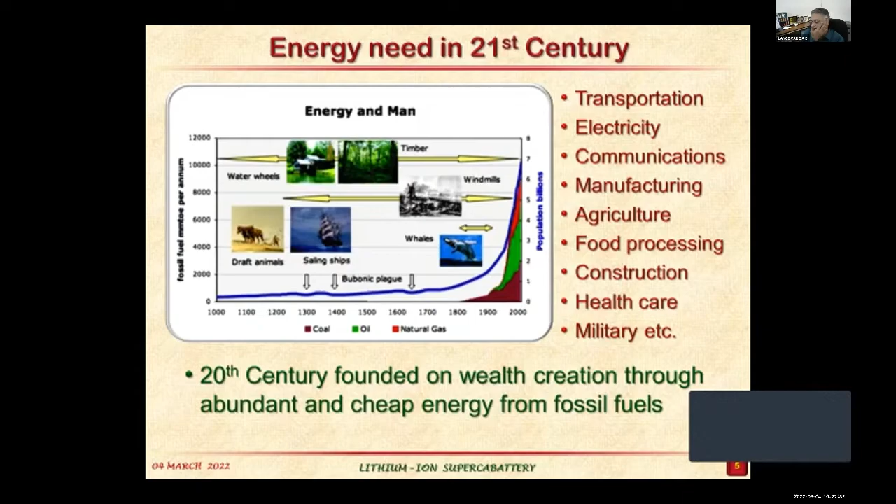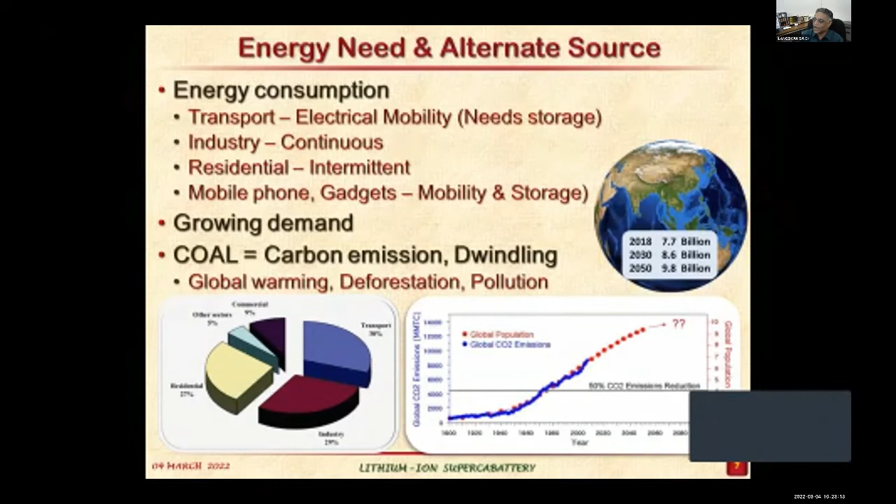So if that is the case, as it was pointed out by other speakers, it is the carbon dioxide, and the stakeholders for generating the carbon dioxide are all given here: agriculture, residential, industry, electricity, and transportation, plus each country has been given a quota of carbon dioxide, and carbon is the issue with respect to today's problems. And transport, all these aspects we will not be in a position to avoid, but we must find the solution.

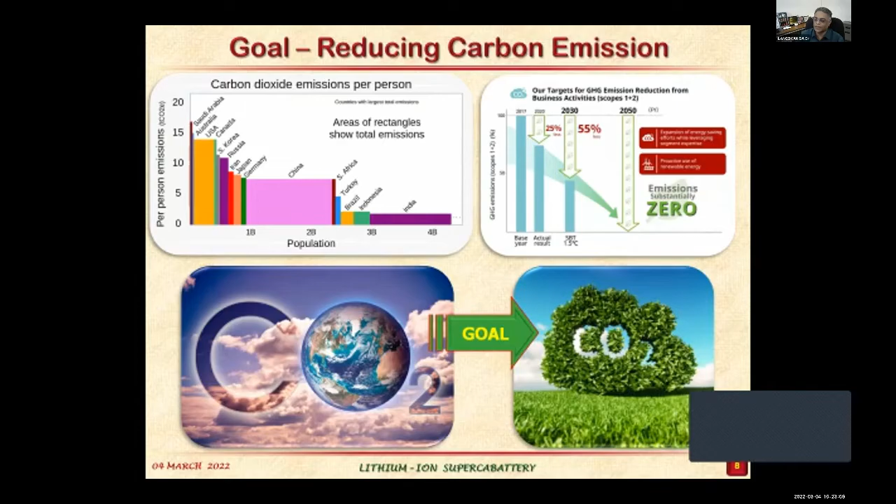The only alternative, as all of us pointed out, is the nature's creation of solar when compared to all other energy sources. The sustained energy coming from the sun is about 23,000 terawatt at an instant of time. So with any increase in the population and the increase in energy, if we make it completely dependent on renewables, definitely the carbon emission as well as the related effects can be overcome.

But the sun is not available all through the day, 24 hours. So we know it is intermittent. Whenever we are not using the power, much sunlight is available. Whenever we need it, sunlight is not available.

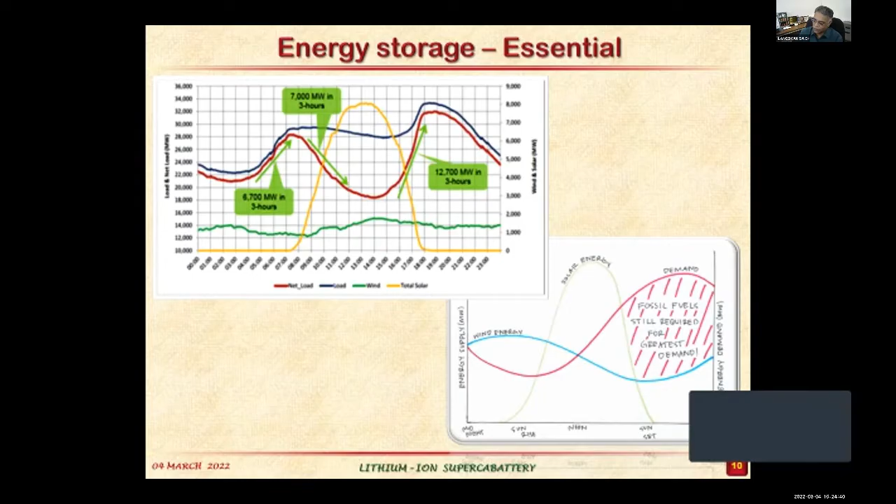So energy storage definitely becomes a relevant portion today. In that perspective, there are many types of energy storage technologies available. But is it possible for us to adopt all of them? When it comes to mobility especially, if you see the capacity for energy, the time duration it is available is very short. So when it comes to mobility, it is the electric based systems like battery

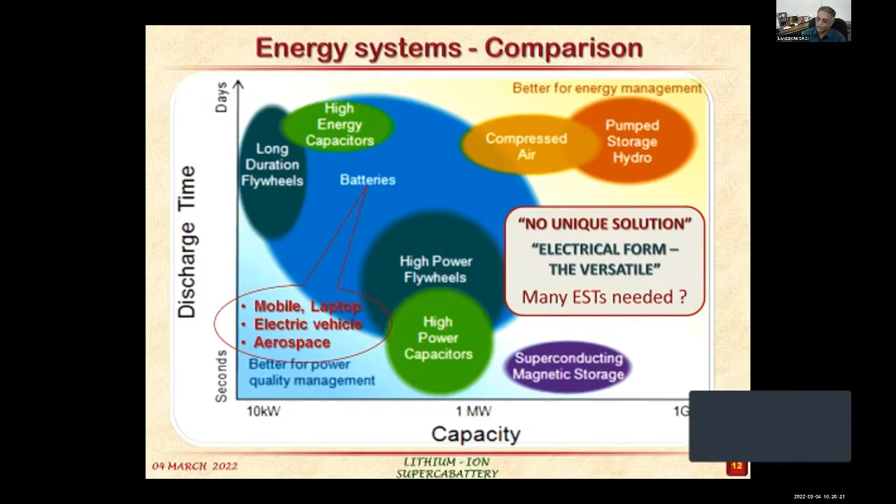which are very important, because for a mobile or a car, or even for our launch vehicles what we are working on, I cannot carry magnetic storage or flywheels, and long duration compressed air kind of things is not possible. So it becomes confined to: at the touch of a button, I am getting the electricity. Mechanical aspects will not sustain it, and if a rechargeable aspect has to sustain it, it becomes the battery, which is the versatile form of electricity.

We the space people, yes, our requirement is very less, but still there are launch vehicles, spacecraft, different types of functions which I don't want to elaborate here. But still, technology-wise, we have no other go but to develop electrical energy storage-based energy systems, where these parameters are very much relevant for our terrestrial applications also.

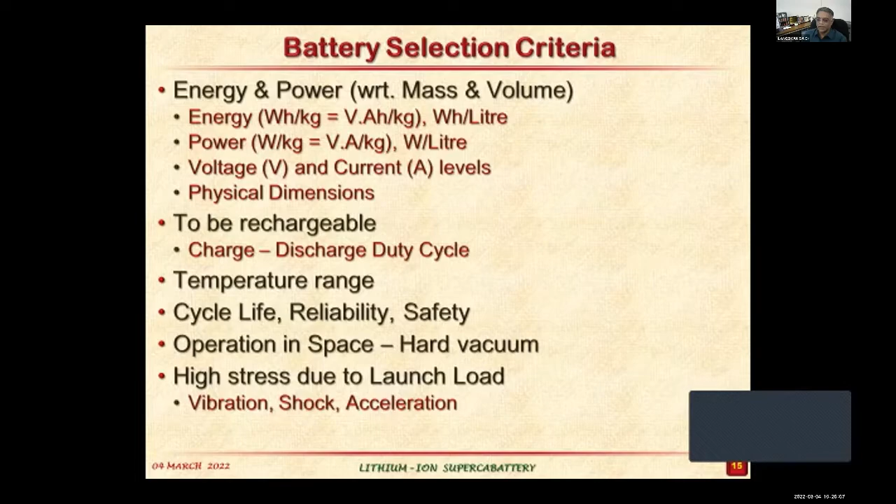Without talking about anode and cathode, it will not be complete. I will not be dwelling into it, because the colleagues or distinguished guests who are there may not understand the chemistry portion. Don't worry about it. There are two terminals in any battery. The electron is coming out from one area, and in another area it is getting consumed.

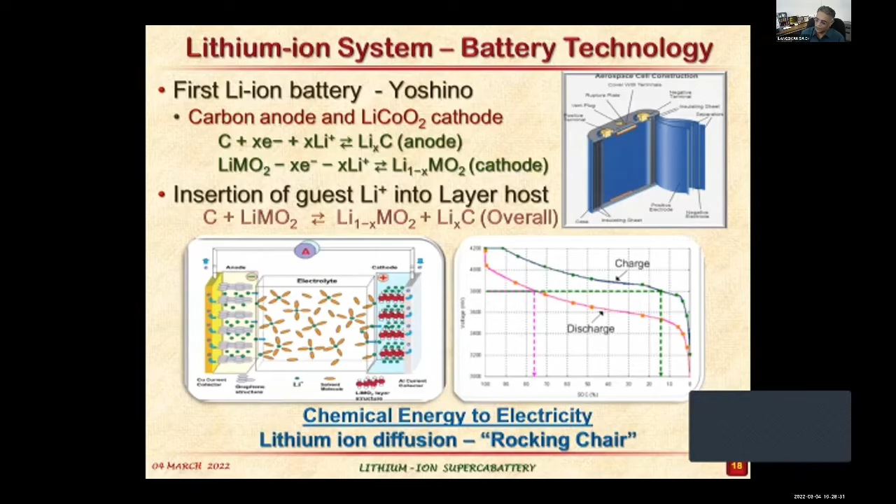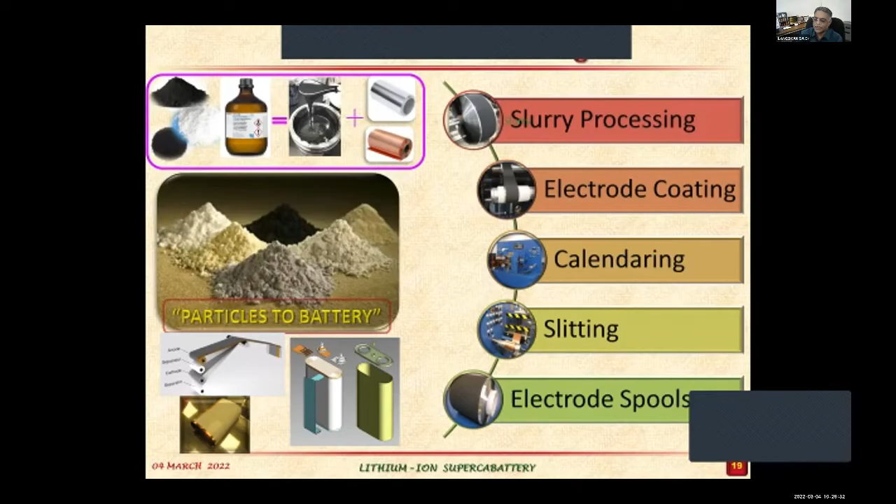So these powder particles are becoming kind of a roll, and the rolls are wound to give the stack, and this is the stack which is used. What I'm trying to say is that I'm giving a grip about the system, starting from particles. These are all the hardware elements - precision slurry coating materials, technology, infrastructure is required, and several types of industries are required to support the raw material supply chain.

All these aspects are important, which we have mastered. Yes, mastering - we are now getting the cell that is coming out of the technology and the lab, or from industry. But what is the problem? Infrastructure - yes, different types of infrastructure are also available. In summary, if I look at it, the baseline technology to produce lithium ion is available. Fine. Then why do we have this kind of hue and cry?

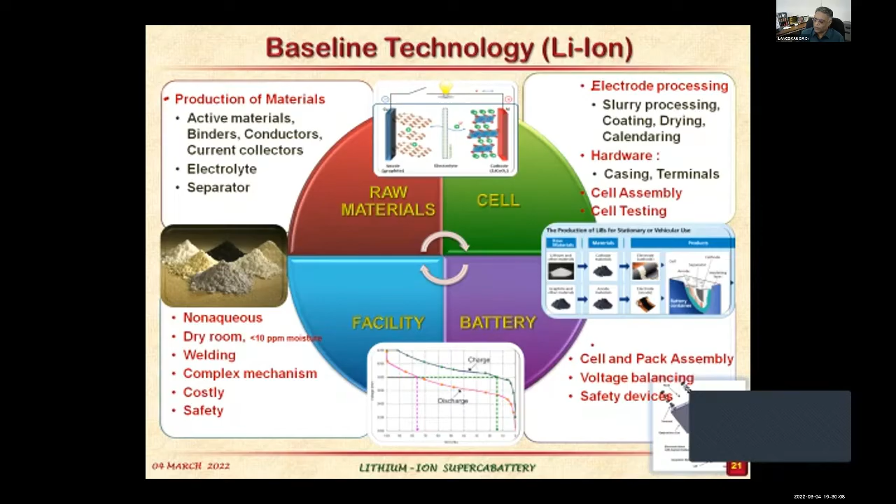But this baseline availability is also well demonstrated by the hard work of my colleagues. We have started from 4 ampere hour to 100 ampere hour for satellites. We have demonstrated - ISRO has demonstrated, VSSC colleagues have put in their life and efforts, a lot of effort has gone in. But still, there are some issues with respect to making it more and more efficient - automatically making it cost effective, making the technology affordable, reliable, safe, and eco-friendly. There are some more points which I'd like to cover.

Electrochemical systems are at the pinnacle - you see the fuel cell, the capacitor, or any other systems. If we have the energy, that means at a level it can supply for an hour or 2 hours, something like that. But when it comes to peak power - see, electric vehicles, always we have the requirement of gear change, I love to ramp up, I love to cruise. In that condition, I need a little more power also, like when an upslope is there, I need the power also.

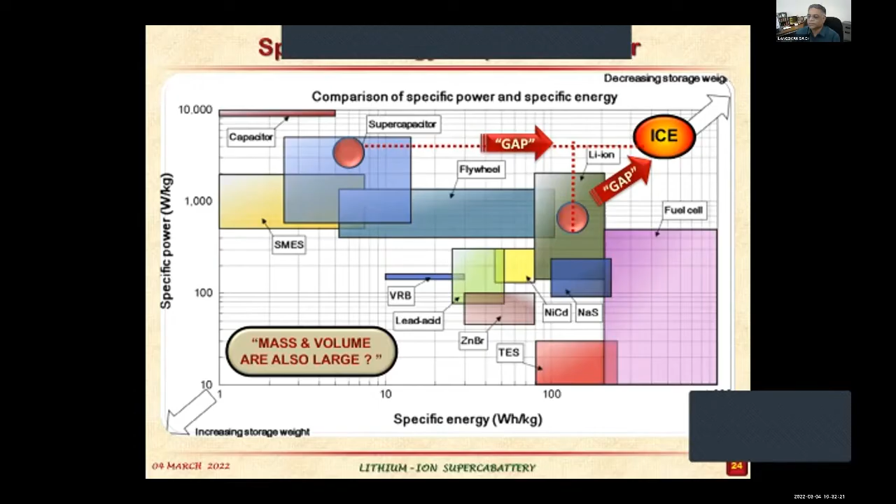And if I am doing so, in that process, if cycle life comes down, then cost goes up - the reliability aspect, then safety aspect. How I am going to overcome these to make the existing system more and more efficient, or in future, like aluminum ion or sodium ion - even if any new battery comes, the situation is more or less the same. The energy is available, but the power is not available. Supercapacitor is one system where power is available but energy is not available. So now, how to fill these two gaps?

I will be more concentrating on lithium ion only. For supercapacitor, I will just bring in the intricacies of making it - maybe our Dr. Narasimha Rao may be touching on that, because I don't want to get into that domain. So this gap, how are we going to fill it, how are we going to make it sustainable? Yes, first of all materials are available. Is it enough that we are able to improve the energy density? Like now we are starting with carbon, that is somewhere here - if I am going to silicon, definitely I will be able to increase the energy density. Is it sufficient if I am able to make a system? A host of materials are available - anode material, cathode material. But in spite of that, there are still some more limitations.

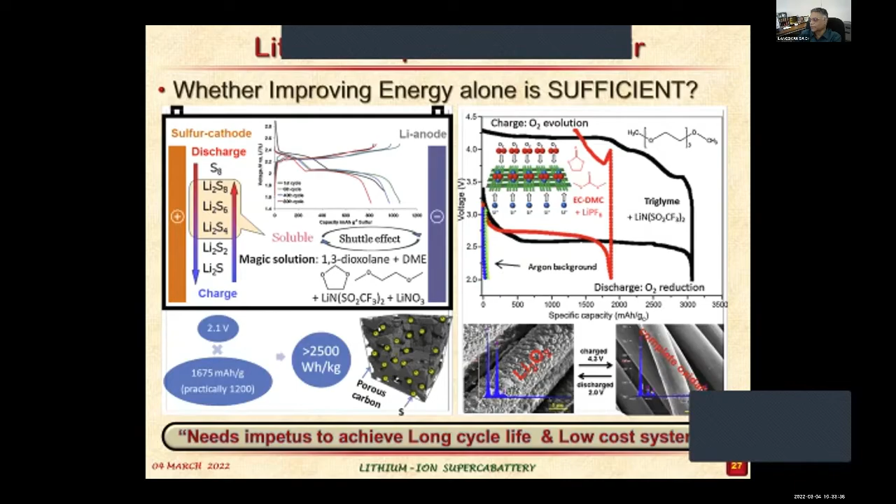Even if we go to lithium air or lithium sulfur, we are not in a position to harvest the full energy available from the battery for an adequate duration of maybe about 5 or 10 years, or about 5,000 cycles. If I get that, the cost will come down, as well as the charge and discharge aspects coming into picture. If that is the condition, I have to improve this aspect in spite of the system being available to us.

See, what do we mean by that? Energy density goes up. If you look at this barrel where lithium metal was there, I'm increasing or concentrating the energy within the system. Mass level comes down, but the power is not going up.

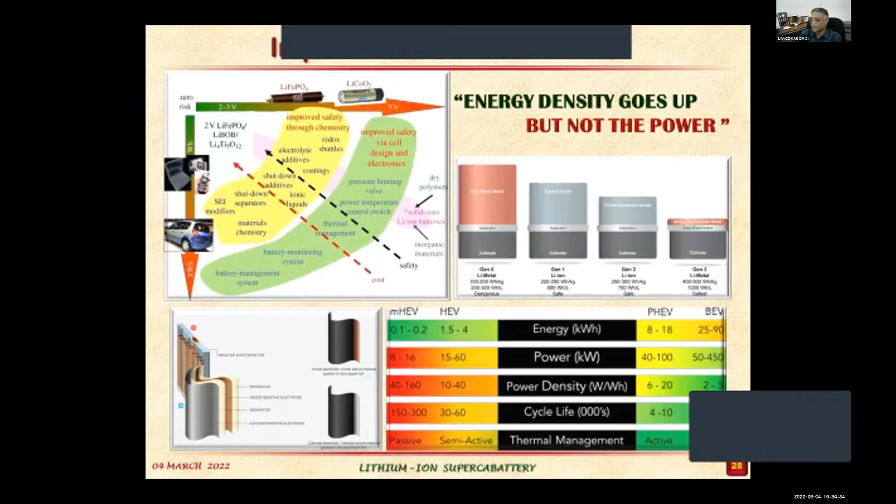So that is what it means: if I go from 100 watt-hour per kilogram to 500 watt-hour per kilogram on the right end, I am only reducing the mass and increasing the energy density, but the power portion is still not at rest, which is killing the life of the battery, increasing the cycle life and the cost portion of the battery. So increasing the energy density alone will not give us comfort. That's what now the red button has come to the right side, that I am able to touch the energy portion of the internal combustion engine.

At the same time, there is still a gap between the supercapacitor power level and what I have to meet in the internal combustion engine. So this is where, if the battery is able to meet the power, it is not in a position to meet it. Why?

Is there any issue? Any energy storage system may get charged over the daytime, but I need to get this power out during about 3 to 4 hours - over 12 hours, whatever energy is stored should come out in 3 to 4 hours. That means it will be storing the energy at a lower rate, but delivering the energy at a very high rate. So that's what is actually an efficient energy storage system.

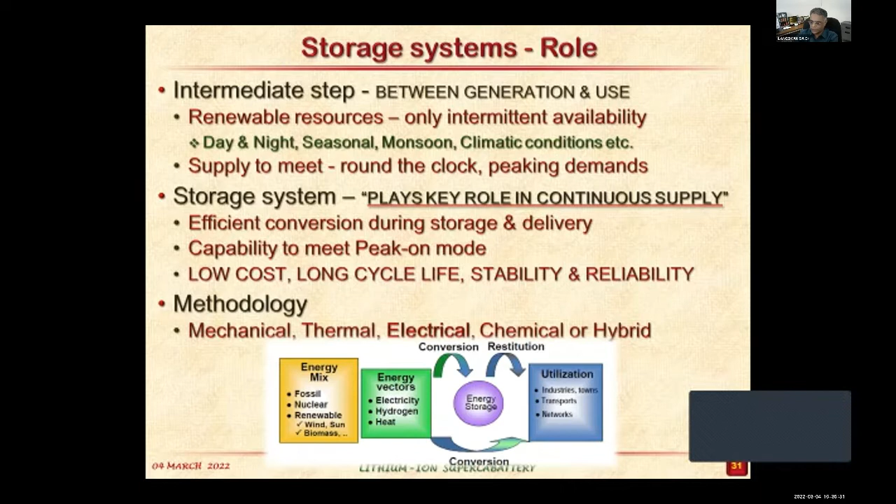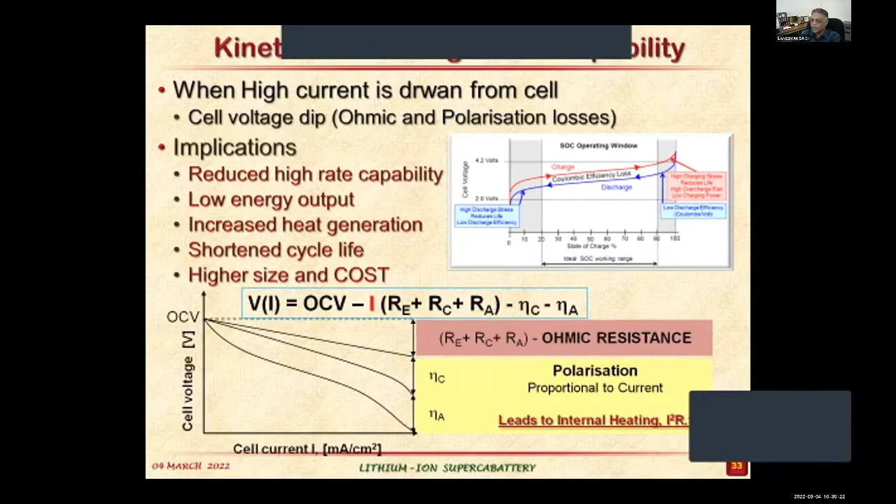So if you see all these conditions - the voltage level, charge rate, fast charge rate, fast discharge rate - all these things are eating away the energy which is not available from the battery. Is it technically or conceptually meeting? Yes, it does. That's why the available voltage is reduced by I times the resistance value, which is the negative form, and I is the one causing the heat to get generated. So if I force high power, automatically I will be losing energy. That is what it conclusively says.

Is it true? Yes. If I look at the kinetics, if I look at the electrode construction, if I look at how the electron is coming out, all these things are definitely in line with why it is having slow kinetics. Now, how am I going to come out of this?

Energy is available, but it will slowly only give it. Is it possible that I am going at about 30 km/h speed? Not possible. Supercapacitor - we know how this conventional capacitor and supercapacitor are differing, so I don't want to get into this one much.

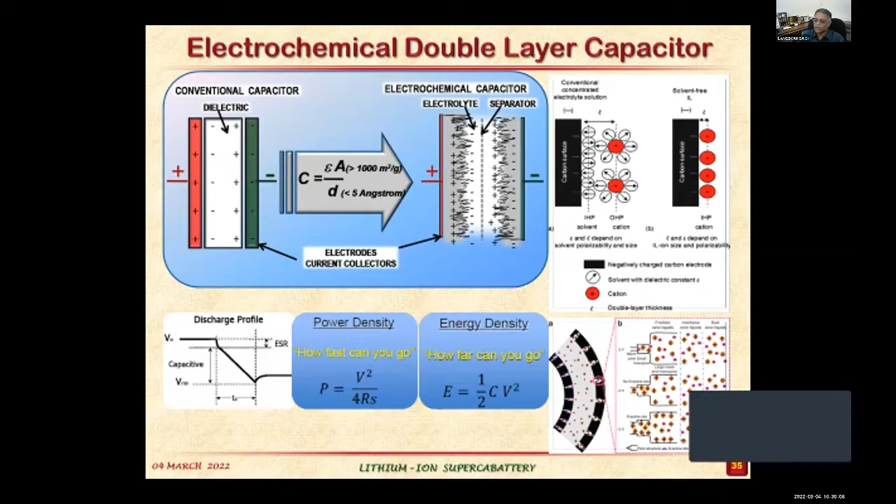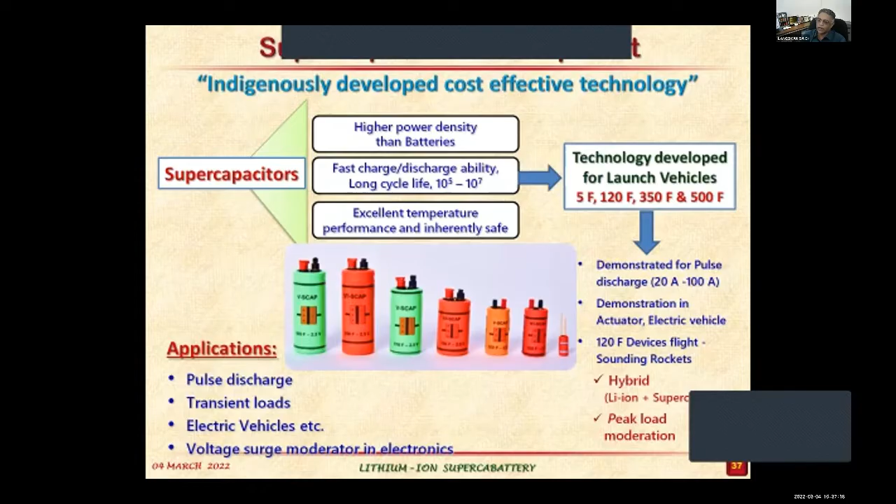But still, I will use the concept we have developed. So one is something like the rabbit, where the charge and discharge will be fast, it will come down quickly. But the other one, the battery, is something like a tortoise, where it will slowly go, but for a long time. If suppose I am able to mix these two, whether I will be able to get both is the point. So we have done the development here. The concepts are very much meeting, cycle life is there, and safety aspect also is there.

In our launch vehicle, we could also prove the technology of the supercapacitor. Everything fine, but the only thing is it will be able to give power only for about 1 or 2 minutes. Where trams are all using the supercapacitor, but every minute they have to charge it.

But this is the time at which we were able to concentrate on battery and supercapacitor. Suppose the one which is having lower energy - the battery has higher energy, lower power. But the electrochemical capacitor has higher power, lower energy. Suppose if I combine these two as a hybrid, I will be able to touch both the power aspect as well as the energy aspect.

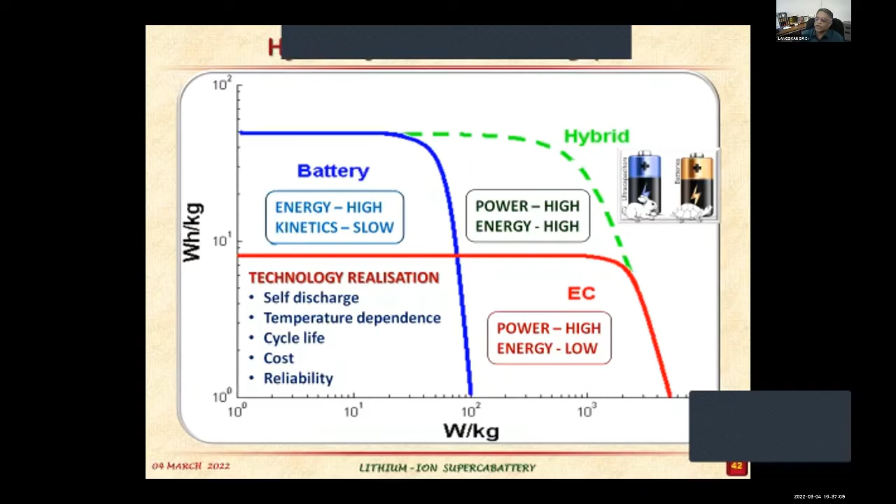So that was the one which gives the confidence. If you see the blue curve, at a slow rate we will be getting the power. The red curve is the one which, if I increase it by 10 times, I will not be able to get anything. If I combine the supercapacitor, two supercapacitors across one battery, I am able to get the 7.5 peak as well as 0.7 continuously, which is the ideal condition required for any electric vehicle.

So now this was the confidence. We tried, we combined the concept of two concepts into a single hybrid system. We could see the red line where we are able to get a very low drop. So the energy is fully available, power it is able to meet.

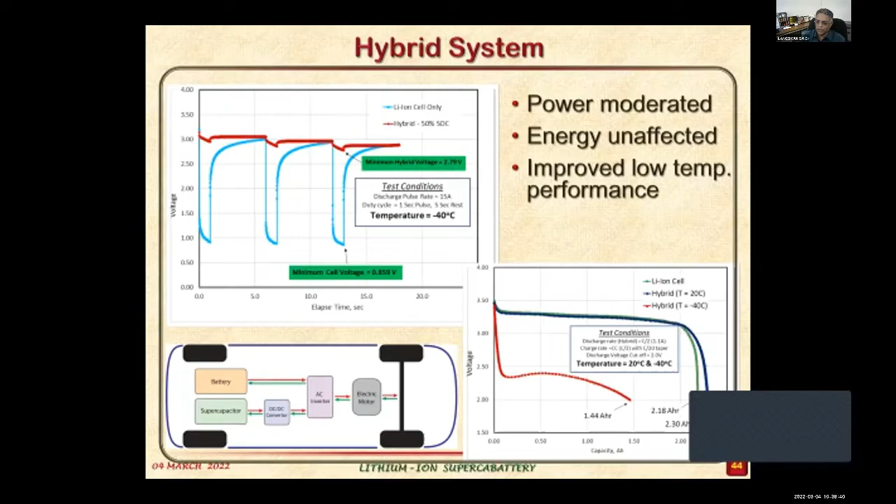Otherwise, the blue one will be drawing so much. So any electric vehicle, in line with battery, if I am having the supercapacitor also, definitely I will be able to meet it. But the problem is that I have to carry two devices, and if I am carrying two devices, then the efficiency comes down.

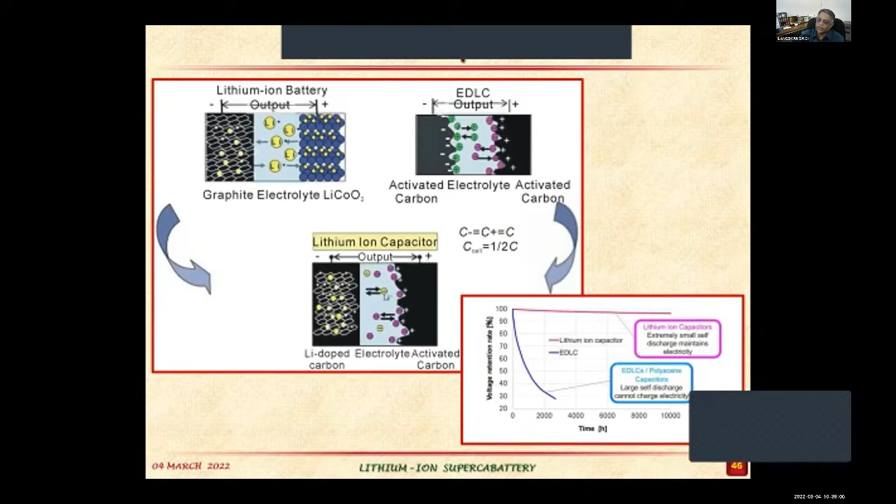Can I combine these two? That means if I take the battery electrodes, anode and cathode are there, and the capacitor, anode and cathode are there. If I combine the anode with the cathode of the EDLC, I am again limited by the capacity of the supercapacitor on the right side - the cathode is limiting it. What is to be done?

That is what was our complete problem. So the peak should be handled by the supercapacitor, and the continuous sustained current should be handled by the battery. That's how we were planning.

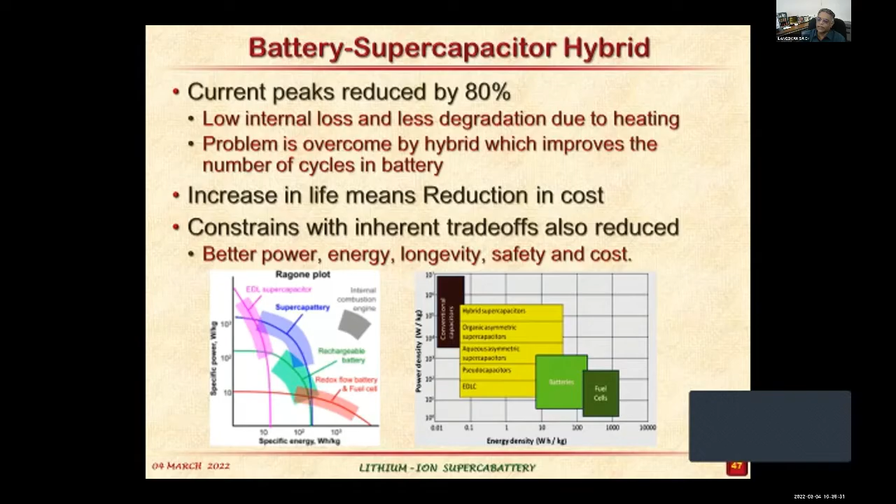So when we planned like that, with one small car, we could demonstrate if both I am having, but mass-wise we are not able to. There is a lot of electronics that comes into picture, taking care of the voltage of the supercapacitor and the voltage of the battery. So this was making us a little more uncomfortable.

So what we did, we combined both the electrodes inside itself in a novel way, which I will tell you now. That is what we are calling it as a supercabattery. So each one becomes complementary to the other - that way we were able to combine the concepts of both electrodes.

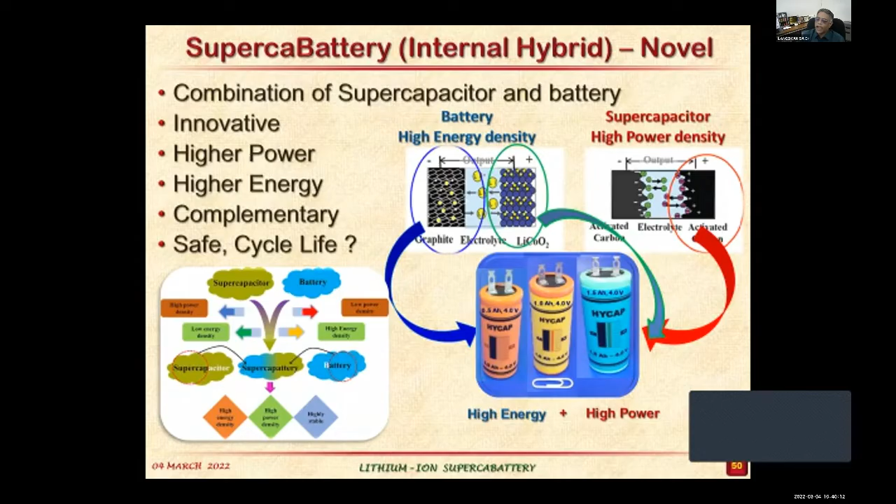So that was acting as a very good power delivery, as well as the power delivery of the supercapacitor, and energy delivery of the battery. So that's how we were able to do it, and we could get the battery performance. Peak performance is coming, overcharge it is able to meet, safety conditions it is meeting, and short circuit it is able to give even about 380 ampere. These are all tested values which we could deliver.

So with that, we got full confidence with respect to combining these two concepts of materials - supercapacitor as well as battery. That is what is the title: battery is complemented for power by the supercapacitor, and supercapacitor is complemented for energy by the battery. So this was the concept which we had in mind.

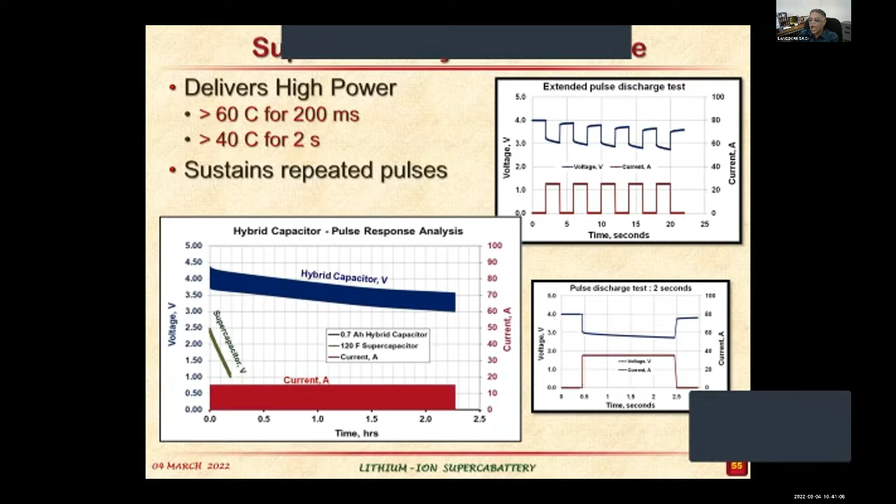And we could also see, in a nutshell, why supercapacitor. So like if I am going down a downslope, there will be power, back EMF will be coming up. That back EMF we will be in a position to use for the recuperation of the battery charge itself. That way, peak power is handled with the supercapacitor, and peak backup also is saved with the supercapacitor.

But at the same time, the battery is not allowed to see the peak current, so life is improved. So the safety aspects are also better, and the short circuit aspects are postponed. Thus the cost aspect comes down. So these are all the points which we were looking at.

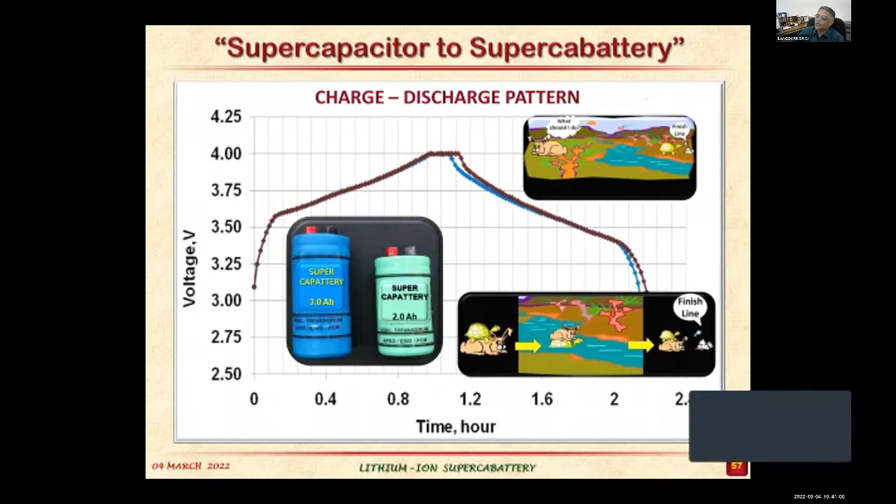So now, in our management parlance - earlier, the tortoise and the rabbit were alone, meaning they were having difficulty, so both of them were in a lose-lose situation. The rabbit and the tortoise were apart. But nowadays, what we do is combine both of them. On land, the tortoise goes on the rabbit, and when it is water, the rabbit goes on the tortoise. So at the finish line, both of them are reaching. By combining these two concepts, we could get a situation wherein power as well as energy are both delivered.

Now that I am able to confidently say that supercapacitor and lithium ion, if we are able to combine, we will definitely be meeting the internal combustion engine. The supercapacitor is able to thrive the battery. So battery concept alone may not be sufficient. Even if I increase the energy density, there should be a capacitor in parallel. That way we will be able to make them together a complementary system, so that we meet the requirements in a much better way. That is my point.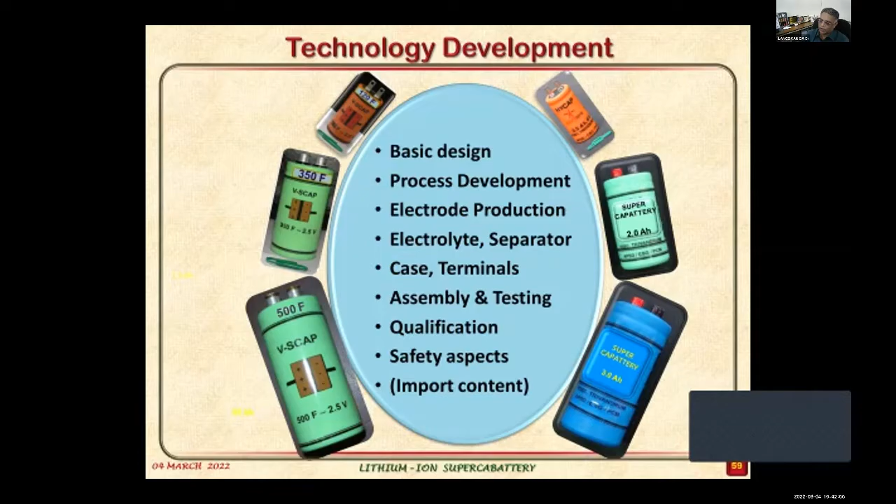On technology development, all our colleagues here have gone up to 500 farad supercapacitors. For our requirement, supercapacitor wise, up to 3, it can be easily scaled up. This is yet another situation where we demonstrated to the Honorable Minister in 2009 in Pune, for a big car, supercapacitor plus battery we could demonstrate.

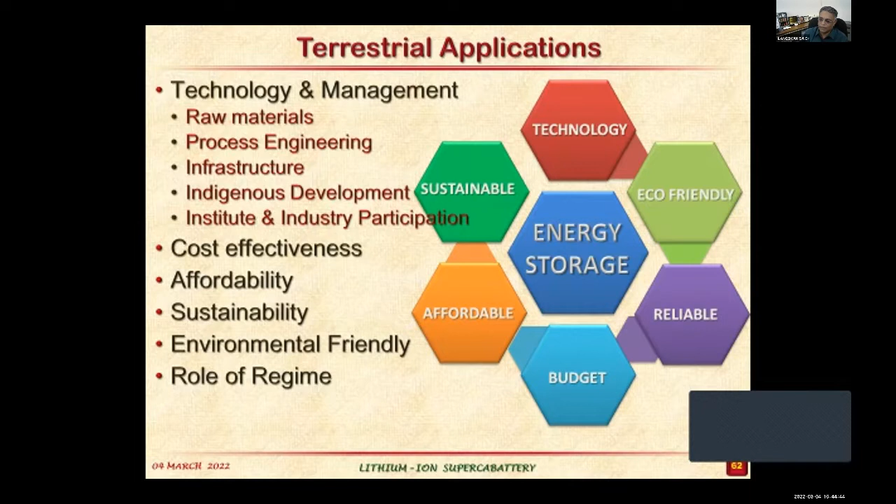Institute can come out with materials and process engineering. Industry shall be in a position to completely adopt from that, and definitely it is easy for us to prosper.

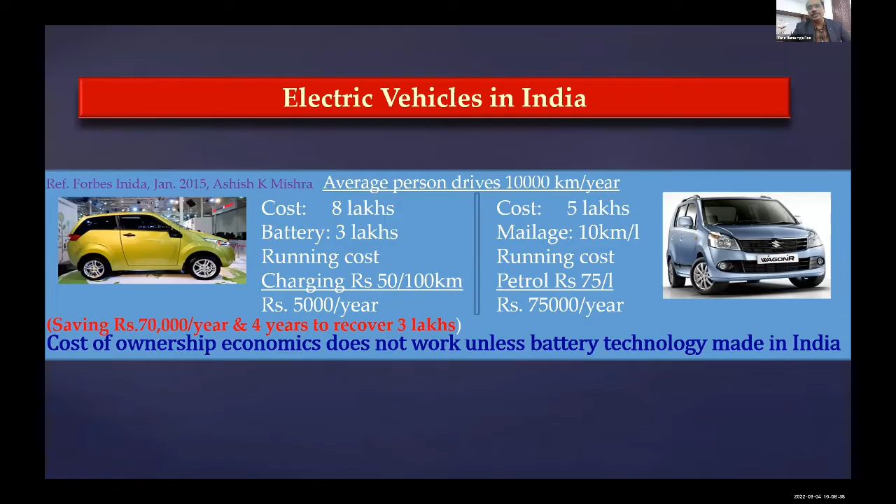Imagine if you can make your vehicles within the country, make your battery packs within the country, which is what's happening now, and if you can make the cells and materials within the country, you scale down the cost drastically, which makes the technology more competent and more adaptable. One more key point I want to make is about the firing of these vehicles.

Just a week back, there was an Indian company, Olectra, whose buses use imported battery packs, and one bus got burnt at Mahatma Gandhi bus stop.

Earlier we had scooters and cars catching fire, and on October 12th there was a fire accident that became very popular in the media. We then had a panel discussion about how to avoid these battery fires. I'll explain why battery fires happen when I get to the next slide.

If you look at cell manufacturing, 60% of the cost of the cell is materials. The remaining goes into the machines used for making the battery cells, but I think it will take more time to make those machines within the country.

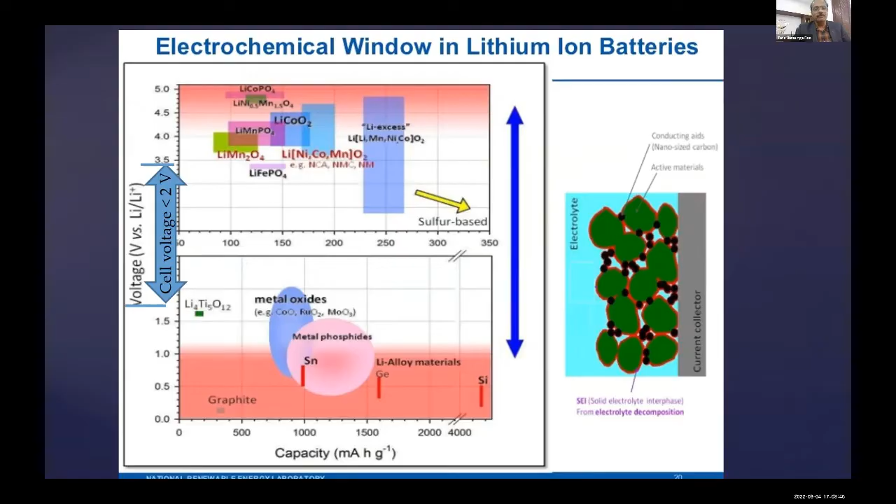So indigenizing the LFP material for the supply chain in the next 2 to 5 years, when all these battery plants come, they need the material, LFP. And if you depend on imports, the demand is growing very high all over the world. So even if you don't get cost effectiveness for LFP, you need to have LFP supply within the country for the sake of production and meeting the demands of our own car companies. So how to do that?

It is very easy to make lithium iron phosphate. Even a high school kid who knows a little chemistry can take the raw materials, mix them and do the solid state synthesis. But LFP is an insulator by itself, so it cannot draw the current. So LFP has to be coated with carbon, and that's the first thing. Each particle of LFP is coated with carbon to draw the current from the electrons generated by lithium intercalation and deintercalation to the current collector, the aluminum or copper foil.

And second, you have to make the lithium iron phosphate nano size because, as an insulator, the electron cannot diffuse a long distance. So the diffusion length comes down with smaller particle size. This is one key challenge for making this material. So we have established the method by solid state synthesis and shown that we are on par with any imported material. We compared with Clariant and Japanese companies like Toda, and we established that.

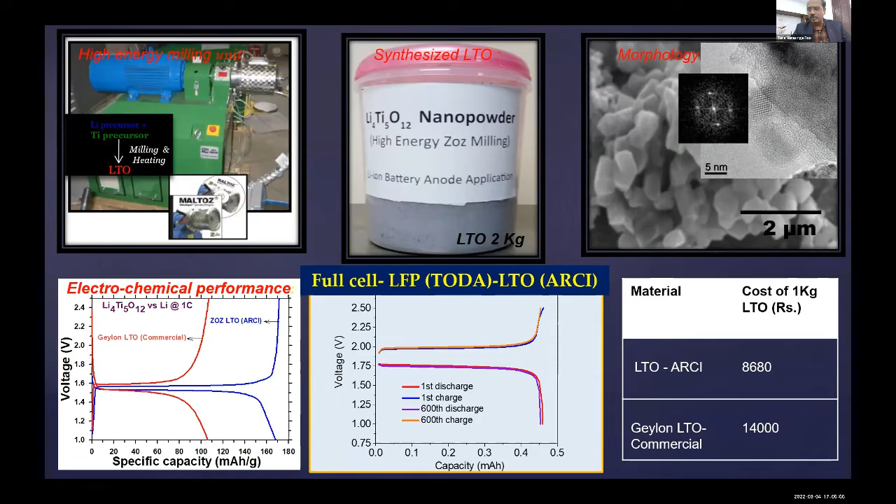So this is the battery materials. We also have similar technology with lithium titanate, fully developed and much cheaper than lithium iron phosphate, and we are waiting for a technology receiver; we have some contacts. We demonstrate at different levels, in the form of a fan or lighting, and some small electric bikes too. So now coming to supercaps, same thing. Supercaps are very well known, and Dr.

Ilangavan nicely explained the difference between the supercap and battery. And he also said that the material for the supercap is also key. And it's not so difficult to make a material. Maxwell is one well-known company, an American company, which Tesla bought now.

And they import the raw material, it is YP50, an activated carbon from Kuraray, Japan. And Kuraray makes this YP50 from coconut shells. They don't have enough coconut trees, so they get coconut shells from Sri Lanka, India and other countries, and then they convert it into the carbon.

And their technology is how to make it nanoporous, designing the nanopores suitable for storing this energy. That is the key technology. It is not converting coconut shell to carbon. And that is protected with a portfolio of patents.

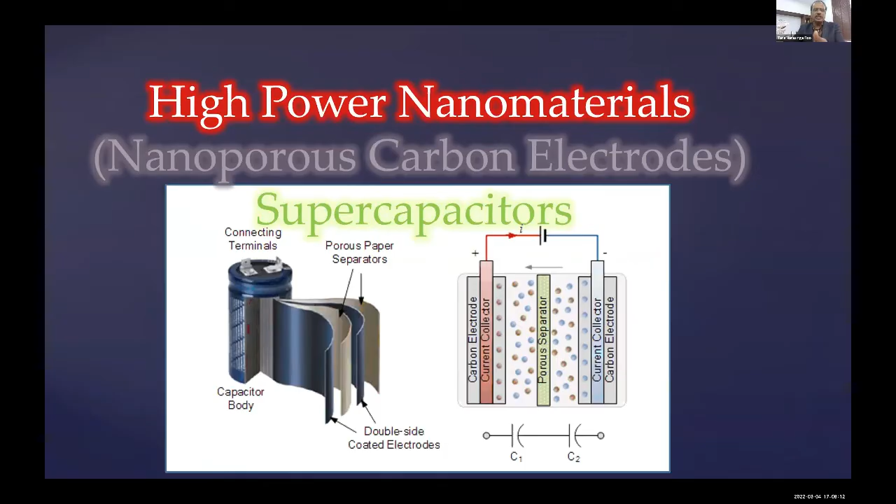So now what we did is, can we do something different? Because my problem is, can I make a material totally indigenized and intellectually protected? He already mentioned battery versus supercap. I don't want to talk about that.

Supercaps have high power density. They can be charged in seconds or minutes, unlike batteries, which take a long time, but batteries have high energy density. In China itself, they have plenty of lithium, but still they use this technology for their public transport buses because they get charged very fast.

You cannot use a car with a supercap because you cannot travel long distances. But a bus would travel for 5 kilometers, 10 kilometers. They can use a supercap, and whenever the bus comes to the bus station, the connectors touch the cables, and it gets charged in minutes by the time passengers get in and get out. This is already happening, and several countries are using this for public transport.

And what we did is, can we do this within the country? Initially we started with jute sticks, and jute sticks are useless material because once you take the jute skin for the jute bags, the sticks are only firewood, but they're very lightweight with a cellular structure. We converted them under nitrogen atmosphere to carbon with a proper KOH activation process.

We get graphene-like carbon with a very high surface area, above 1500 square meters per gram. We demonstrated that its performance, you can see here in the cyclic voltammetry, is on par with YP50, and the cost is pretty low. So we demonstrated a supercap of 20 farads. But that's not enough. If you want an electric vehicle to use a supercap, it should be more than 1000 farads.

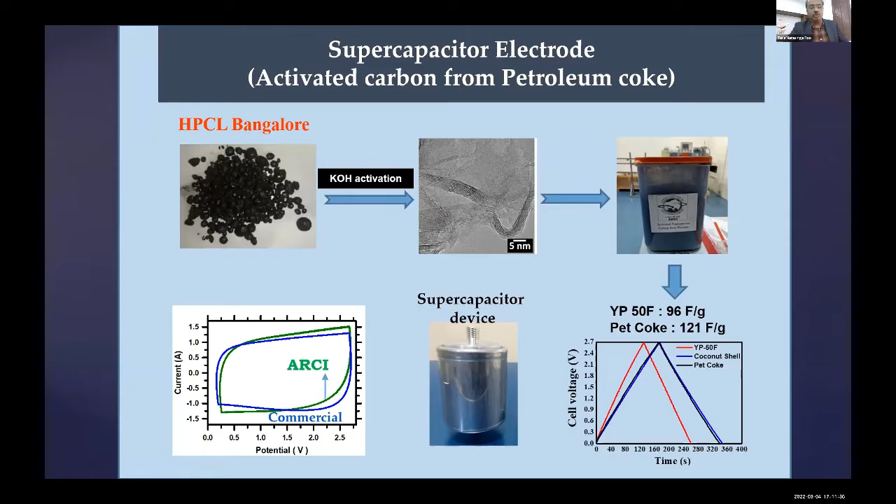And again we made a device with this. Electric vehicles need at least 1,000 farads to support any EV. So we made a 1,200 farad supercapacitor on par with Maxwell, with the help of HPCL, their significant financial contribution, the material sourcing and their expertise.

So we made the pilot facility, and some of the equipment we made indigenously, because for supercaps, some equipment we forgot to buy, since we bought the battery equipment, and some we made indigenously. We understood that equipment can also be made in India, because people think that we cannot make it.

Now we proposed a 50 crore project to DST to make a total battery line within the country at ARCI, with 10 crore support from the company, because unless you indigenize equipment manufacturing in the country, you can never compete with imported batteries from China. That is one thing all the industry should do, and we are doing that for the first time, because our initial success tells us that we can.

And now with partially indigenized equipment, like this in-house designed flattening machine, you can see that the green one is the ARCI supercap and the blue one is Maxwell. We're on par in the properties, we are in the media, and some companies are starting to come up. So this is what my colleagues and I work on.

And HPCL said that you have to demonstrate a bicycle with these supercaps. So a 48 volt motor has to be run with supercaps. That's not so easy. That's why I said you need at least a 1,000 farad supercap. A single supercap cannot have more than 2.5 or 2.7 volts, so you need at least 20 supercaps to get enough energy, even to run 2.5 kilometers.

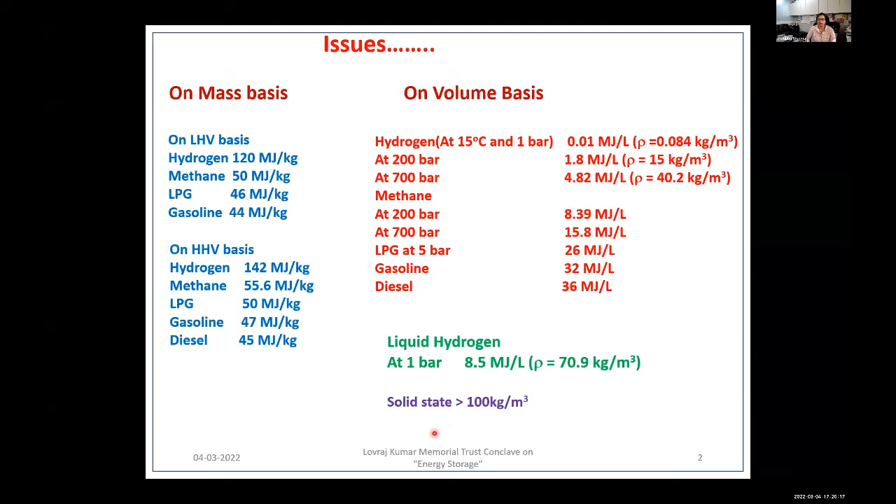So my focus of today's talk will be going straight onto the solid-state storage of hydrogen. As compared to other methods, solid-state has an advantage. In gaseous state storage, since the density is low, you require very high pressure tanks - the commercially available type 3, type 4 tanks are 350 bar or 700 bar pressure tanks, and they use special composite fiber materials, so the cost is higher.

At the same time, when it is such a high pressure, safety remains a concern. The other option could be to cool it down to 20K and make it into liquid. So the density improves considerably, and we can see that in these numbers.

But the process of cooling it down or making it liquid hydrogen is highly energy intensive. It takes up about 30 to 40% of the energy content of hydrogen. At the same time, these require super-insulated vessels, and whatever good insulation we may use, there will be losses involved. So there are boil-off losses. At times, even if you have a full tank and you leave it for a few days, you will find it vacant because of these boil-off losses.

So this can be particularly useful when you want to use it for a short duration, use it after refilling.

However, another option I'm going to discuss is solid state storage. This method has a higher volumetric energy density, and it is the safest method because you are not dealing with such high pressures or liquid, such low temperatures. At the same time, there are challenges too, which we will see. So you do not require either a high pressure or a low temperature for solid state storage.

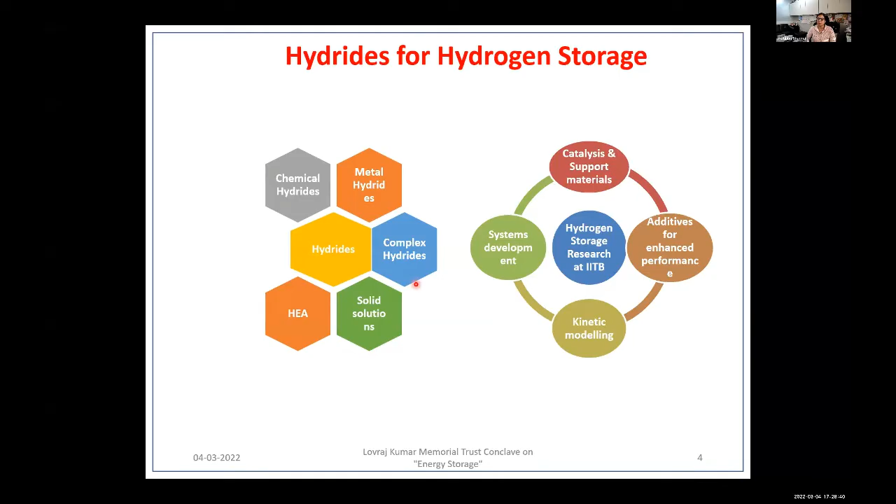So if we start with the metal hydrides, there are different classes. These are either intermetallics, where you have a combination of a metal element A and another B, which can be alloyed together to form AB, AB2, A2B, AB5, or A2B7, and several other alloys. Each of these has a separate characteristic.

Just to give a few examples, the AB5 type, the well-known example is lanthanum nickel 5. It has the advantage of low hysteresis—whatever the charging or discharging, it is complete without any memory, so no losses. It is easier to activate, and it is tolerant to impurities, if any, in the material as well as in the hydrogen gas stream. But the problem is the capacity is lower, and the cost of the raw material is higher.

Then there are materials like AB2 type hydrides, such as zirconium chromium 2, which have the advantage of higher capacity compared to AB5. But the problem is they are difficult to activate—meaning the first time you put in hydrogen, there is a lot of resistance. There is an activation barrier you have to cross through, which can be done by subjecting it to high temperatures or pressures.

Another class is AB, where the cost is comparatively lower and they can work close to room temperature, but the problem remains the difficulty in activation.

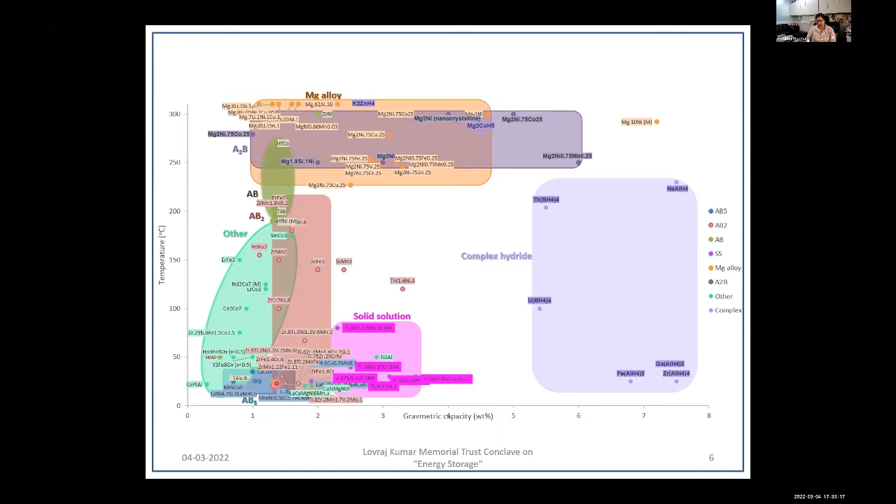Now, the major challenges if we look at these materials is—although they have large advantages—because these materials, when used, have a long cycle life. You can even charge and discharge with hydrogen these materials for thousands of cycles. So they have better safety, because if there is a leak in such a tank storing metal hydride...

In that case, the reaction of hydrogen leakage—hydrogen coming out of these materials—is an endothermic reaction. And in that case, the reaction will itself stall, and as such there won't be a threat of any explosion or catastrophic event. So these are safe to operate.

They operate at conditions close to room temperature and pressure. They have higher volumetric density, and there are materials which can be completely discharged. So whatever you have put in, that amount of hydrogen you can take back.

Now, it's also the case that a typical material when it comes to metal hydrides—we say the maximum that traditional materials store is 2 weight percent. So we can do the calculation that metal hydrides operating at room temperature and ambient pressure conditions can be cost competitive to a 700 bar pressure tank.

Now, due to the lower operation, we can say we can still get a higher volumetric density, because the volumetric density of metal hydrides is far ahead of that of compressed hydrogen tanks. At the same time, we are operating at a lower pressure.

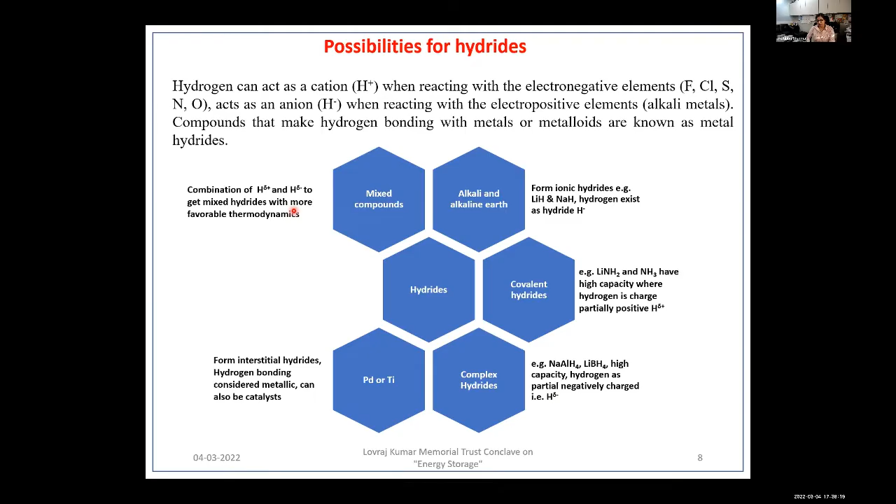So what can be done is we can have a combination wherein both these components are put together, so that we have a mixed hydride, and that could favor a better thermodynamics using that class of materials. Now, what exactly we look at when we talk about metal hydrides is...

These metal hydrides should be easier towards activation of the material, meaning the uptake of hydrogen as well as release of hydrogen, also known as the first hydrogenation-dehydrogenation cycle, should be easier. It should not require very high temperatures and pressure. At the same time, the uptake and release should be faster, so the rate should be higher, and they should have a reasonable heat of formation of hydrides.

This becomes very important when we talk about large-scale solid-state hydrogen storage systems, because one process is exothermic, the other is endothermic. A lot of heat needs to be supplied and taken out, so thermal management becomes important. In that case, metal hydrides with an optimum heat of formation, somewhere around 30 kilojoule per mole, would be very good to operate with.

These materials should be stable under repeated cycling, so cyclability is important. They should not get poisoned by impurities, and the safety associated with the use of metal hydrides when operating with such tanks is also important. At the same time, cost matters.

To give you an example, BCC alloy like titanium-vanadium-chromium alloy has the advantage that absorption takes place at lower pressure, 20 bar, and at room temperature. It has faster kinetics, and theoretical capacity is 4 weight percent. You can have a wide range of alloys by changing the composition of these materials. The problem remains that they have a sloping plateau and an incubation period.

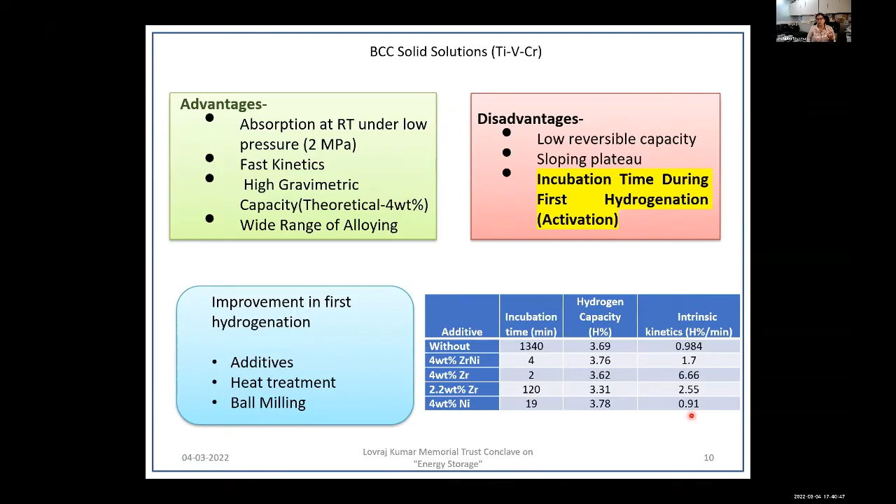Now another class of material is the well-known example of iron titanium. Although this has been studied, there are still several problems associated with that. It is a good alloy in the sense that it is cost effective. It can be operable under temperature and pressure conditions which can be easily coupled with a PEM fuel cell.

But the problem remains that it has plateau instabilities. It requires an activation step which needs high temperature and pressure. What can be done is we can dope it with various other dopants in small quantities such that it can be made easy to activate, while still getting many practical applications using this alloy, and we can even use industrial grade materials.

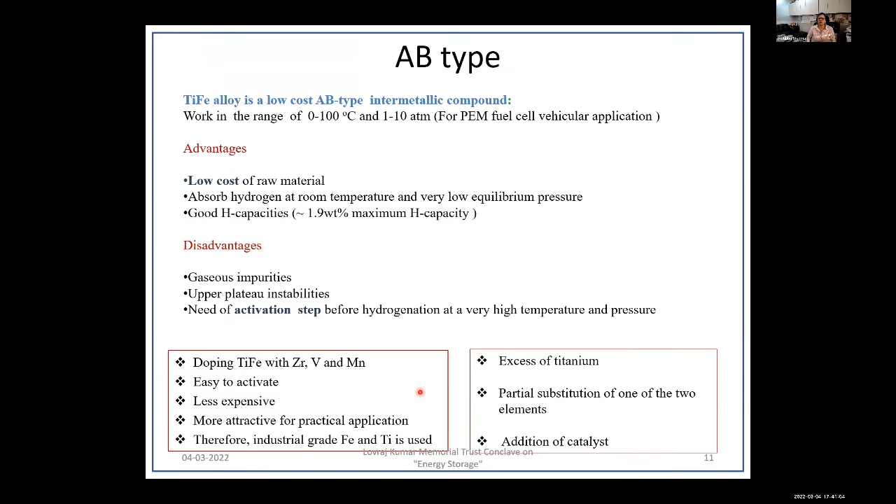We have extensively studied this alloy. We have seen the effect of going for non-stoichiometric composition instead of equimolecular, what happens if we substitute one of those elements, and what if we add a catalyst. If it is pristine, there is no activation taking place for hours. But as we dope it with different elements, the activation gets much faster. Earlier it required heating at 400 or 600 degrees for 12 hours; now we can do it at room temperature and 20 bar.

There is an industrial partner and UQTR, a Canadian university, involved in this work. So this was some examples of one class of hydrides, the metal hydrides.

The other class is like chemical hydrides, wherein they store hydrogen in much larger quantities than conventional materials, whether it is a physical form of hydrogen like liquid hydrogen or the adsorption way of storing hydrogen like carbon nanotubes. These materials can store very high quantities of hydrogen. We talk about 19.6 weight percent as against 2 weight percent in case of metal hydrides.

But if it were so straightforward, we could have found the solution already. There are disadvantages still: the hydrogen we get is not pure, and the problem lies with regeneration of these materials. These materials give hydrogen in steps. In the first step, 1 mole equivalent of hydrogen is released; in the second step, 2 moles; and in the last step, 3 moles, which takes place at a higher temperature.

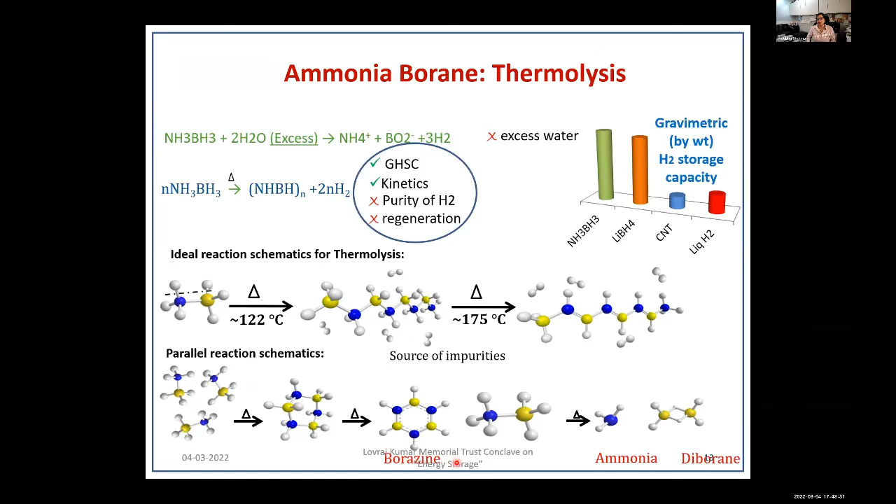So why not take advantage of only using the second step and get 13 weight percent hydrogen from this? We can also suppress the undesired products we get, like borazine, ammonia, and diborane, which could be poisonous for various other applications.

We have been trying to do that in our lab. We have seen that with different dopants, we were able to suppress the unwanted products to zero. Although the release of hydrogen decreased, with different additives we were able to retain it back. Now what we are doing is working on the regeneration.

Finally, with regeneration, these materials regenerate again in different steps, so you cannot do that on-board. It has to be a 2 or 3 step regeneration. Now we are able to make it a single step regeneration, and the yield we could get is 85% in the regeneration step, in a single step, one-pot synthesis and dehydrogenation.

So this is what we were able to do: instead of having multiple steps, we just dehydrogenate it and put the hydrogen back, so that this could be suitable for on-board application, and we can still get about 13 weight percent capacity with such materials.

Another class of materials known for their higher storage capacity is the various borohydrides. We can get hydrogen from these either by thermolysis, heating them, or by putting them in water. When you use thermolysis, the temperatures are higher, so sometimes hydrolysis favors the reaction, and you can do that at room temperature.

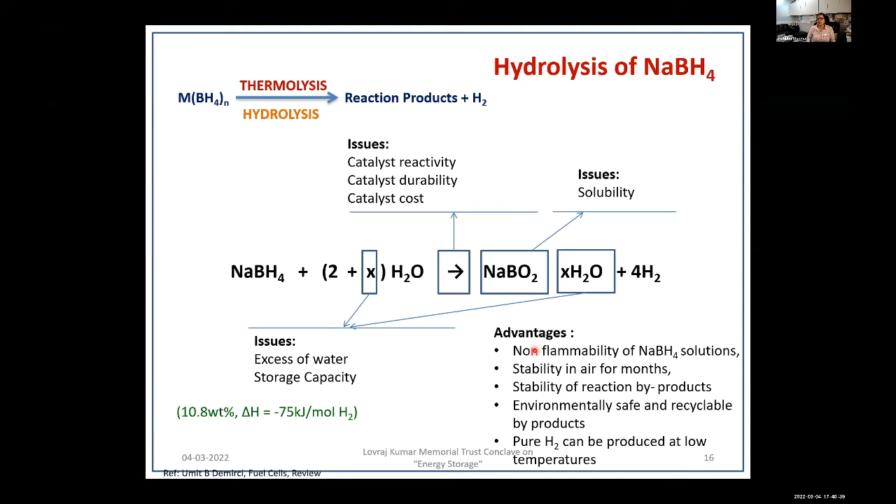But the advantages with this system is that it is a non-flammable, stable system which has a stable byproduct, and this is an environmentally safe method of hydrogen storage.

Now, what we do at our place is we start from scratch, from the atomistic modeling, from the DFT, from atoms level. We take the material to preparing hundreds of kgs of material. From a system design at a computational level, we fabricate such systems to large scale, and then we do performance analysis. So in our lab, we are doing materials as well as systems development right from scratch, taking to large scale. So we start with the parent alloy, whatever alloy we have decided for working on.

We do a lot of DFT to look at what are the structures, adsorption energy, charge transfer processes, and the stability of that alloy. We put in hydrogen in such systems, and then we study which are the favorable places where hydrogen can substitute, how much amount of hydrogen we can get, what is the storage capacity, and then we modify such systems by substituting with different metals, different elements.

Again, we do all these calculations. What is the binding energies of these systems? What are the charge transfer that is taking place? Density of states? And what if we substitute by more than one element? And what is the capacity which we are going to get? Once we have optimized a particular material, then we go for a large scale synthesis. First, we synthesize on 5 to 10 gram scale, and then we go for 10 kgs of alloy synthesis.

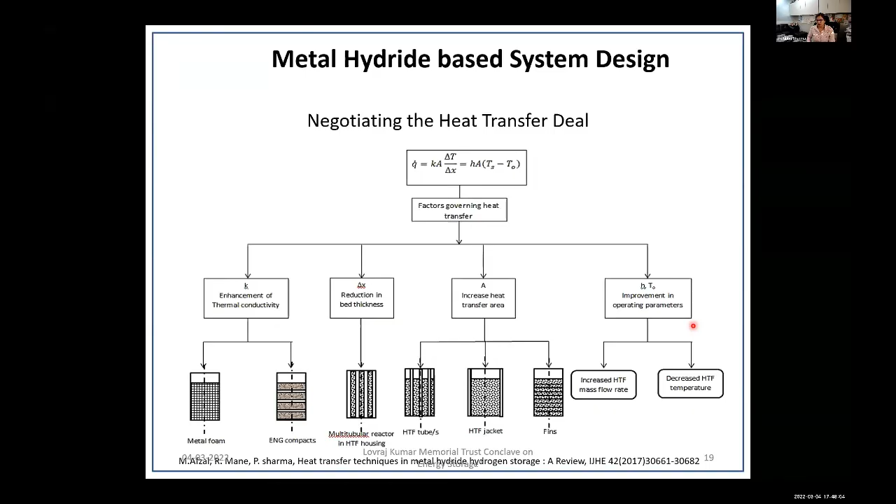Just to give a quick glimpse of the work we are doing, we start from the DFT analysis, designing the material, making it on small scale, then making it on large scale, taking from the computer to the lab scale to an industrial scale system. So this is how we go from material, then we go on to the systems design. We do a lot of simulation modeling and optimization to come up with a heat transfer arrangement with heat exchange area with different types of arrangements, so that the system performs well when integrated with such materials. And finally, we go for fabrication.

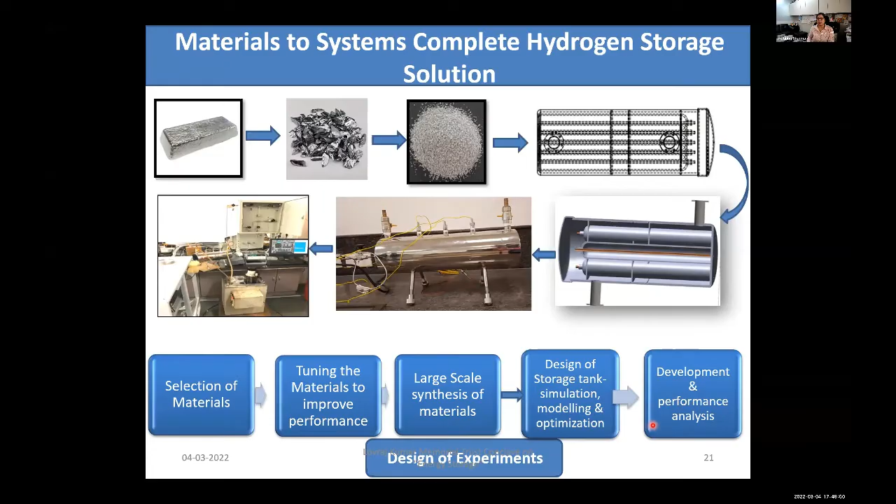So it is like the selection of material, tuning the properties of material to improve the performance of material. Then we go for large scale synthesis of material, designing of the tank, and then finally developing such a system and analyzing the performance. Just to give brief glimpses of the different types of heat exchangers we have worked on. We have worked on bifurcating type of fins or multitubular structures, hexagonal fin network or helical tubes. And we have done a lot of simulations and optimization on these. So we have several papers. If somebody is interested, they can go into the details of this.

Some of the systems that we have developed: a smaller system, 5 kg system, which can store 5 kg of alloy, a 10 kg system, a 25 kg system, a 50 kg system, another 50 kg system.

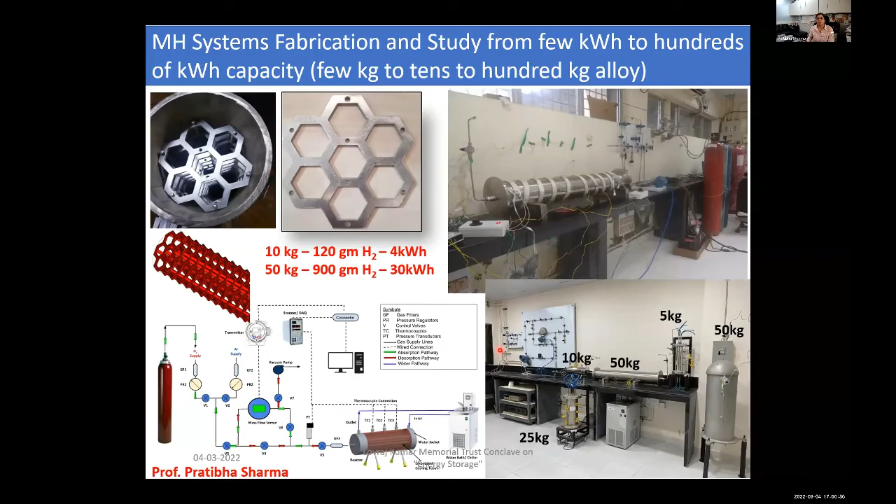Some of the systems are customized for various applications. One system we have designed and made for ISRO, and we have demonstrated systems which can store 1 kg of hydrogen. And then we also integrate them for various applications.

One of the applications we are focusing on is thermal energy storage, wherein you have two different metal hydride beds, a high temperature metal hydride bed and a low temperature metal hydride bed coupled with a solar collector. During the daytime when sunshine is there, you desorb the high temperature metal hydride using the heat which is available, and then you store that hydrogen in a low temperature metal hydride bed. At night time, you can use low grade heat to desorb that hydrogen to generate high grade heat. So this can be integrated with a thermal energy storage system.

We are working on various other applications, like hydrogen purification, hydrogen compression, vehicular application, and backup power using these metal hydrides. So this is the large scale. This is an equipment which can synthesize 10 kg in one batch in 2 to 3 hours. So in one day, we can have hundreds of kgs of material.

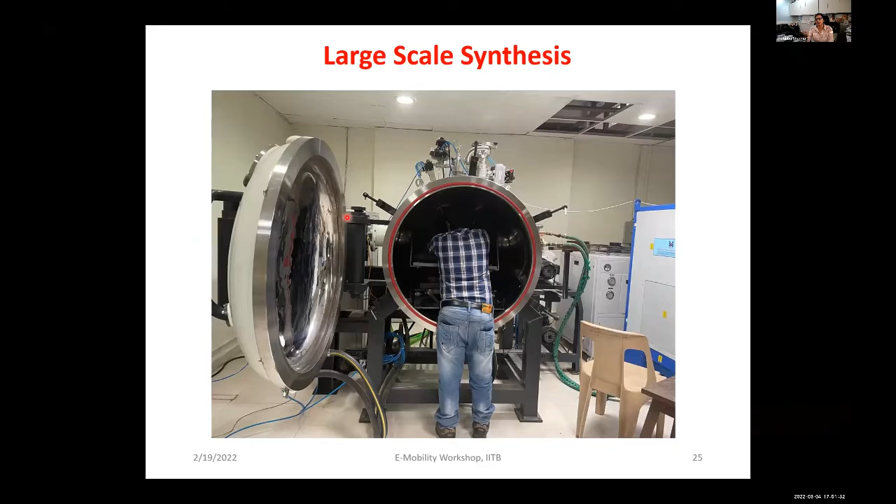This is the earlier shown image of the various different reactors, wherein we can store from a few grams to a kg or more of hydrogen in these systems. Thank you. So this was a very quick overview of the work we are doing.

Thank you very much, Pratibha Sharma. Wonderful presentation on hydrogen storage. I have several questions which I'll just read out. Maybe you can reflect on some of them. The hydride formation, is it spontaneous? Is the free energy change negative? And a related question is, what is the volumetric energy density attainable through metal hydrides? You can possibly take these two first.

Yes. So the delta G is negative. Some of these chemical hydrides, as they are exposed to the environment, start desorbing. These are unstable. We have a wide class of materials. Some of these materials you even have to keep at a lower temperature so that they do not release. They are spontaneous. But some of the materials require a lot of activation energy to desorb, like temperatures as high as 300 degrees centigrade. So they are not spontaneously desorbing.

On the volumetric capacity, in general, the metal hydrides have more than 100 kg per meter cube, 150 kg per meter cube. And this is a general question: is it necessary to have solid state storage when anyway you cannot increase the percentage storage? What's the motivation? I have already mentioned the various advantages as against the other methods, and that makes it quite promising. And is it possible to store hydrogen in clathrate hydrates? Pardon, please? Clathrates? Yes, people have been working on them, but in our group, we are not working on clathrates.

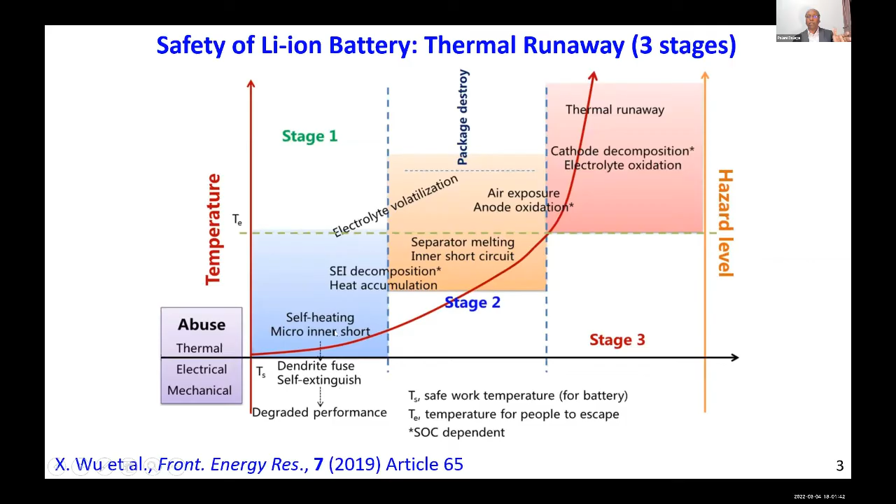If you still allow it to continue, then separators start melting, and further the anode, which is the graphite, starts being exposed to air, and then explosion, electrolyte explosion, and then fire, and then the cathode gets exploded, and then you get into so-called thermal runaway. So you should understand what causes the so-called micro inner shorting. I'm going to take 1 or 2 examples and then explain this.

This is an example of an 18650 cell. I'm going to shake it along the z-axis of the 18650 for 186 days. You can see that the separator, which is a polymer, got melted. That actually shouldn't happen. So this cautions you that whenever you use lithium-ion batteries, you must make sure that there is not much vibration. If you have vibration, that means you are subjecting the cells or pack to so-called mechanical abuse.

This is yet another example. I have taken the same 4 chemistries which I introduced previously: NCA graphite, cobalt-rich NMC versus graphite, nickel-rich NMC versus graphite, LFP. And if I look at charge discharge, this is 2-hour charge, 2-hour discharge, or here 2C discharge. 2C discharge means 30 minutes discharge. You can clearly see LFP graphite is the one which generates low heat. This is joule per ampere hour, normalized to ampere hour, because all these chemistries have different ampere hours.

So LFP graphite is the one generating low heat as compared to NCA graphite, then nickel-rich NMC graphite, then cobalt-rich NMC graphite. Cobalt-rich NMC graphite is not used in industry at all. People discard that, but it has its own interesting physics as well as chemistry, which I will not cover right now. Then if you go to 5C, which is 12 minutes charging and 12 minutes discharging, only LFP chemistry can be charged and discharged in 12 minutes. None of these oxide chemistries works. That's why LFP chemistry is highly robust as compared to the oxide chemistry.

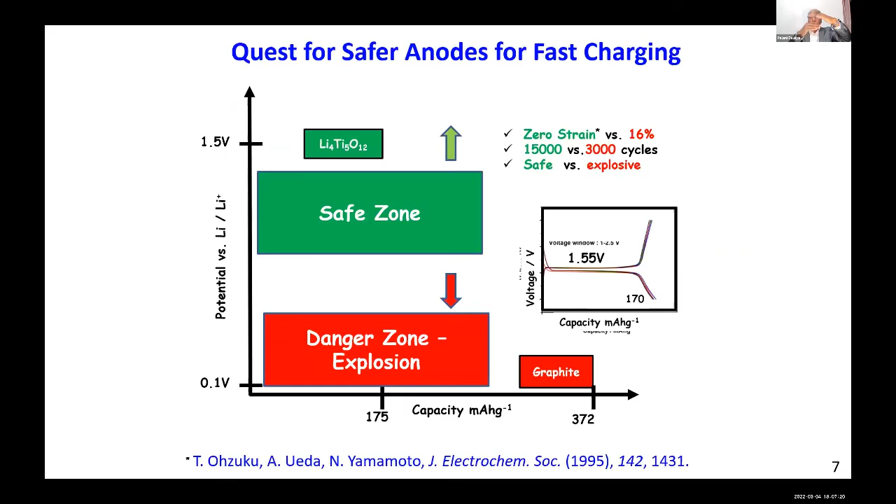And then you may ask, what is the problem? Why can't we go ahead with that? The problem is the following: lithium titanate operates at 1.5 volt and the cathode operates at about 4 volt, so the typical cell voltage is in the range 2 to 2.4 volt, and hence the energy density is far less compared to LFP graphite.

LFP graphite in 18650 form, you can get somewhere about 100 to 105 watt-hour per kg, and the cost is about $100 to $125 per kilowatt-hour. Whereas here, this is about $500 per kilowatt-hour. So for any technology you take, NMC versus LTO or LFP versus LTO, the cost is pretty high at $500 per kilowatt-hour.

It is safe, it helps with quick charging and quick discharging. Unfortunately, it is at least 5 times higher than LFP versus graphite. But you should bear in mind, this is the only technology used in the marine industry. Anything - ferry, fishing vessel, yacht, big ship - only LTO technology is globally used, none of the graphite technology, mainly because of the huge vibration the ship or ferry is subjected to.

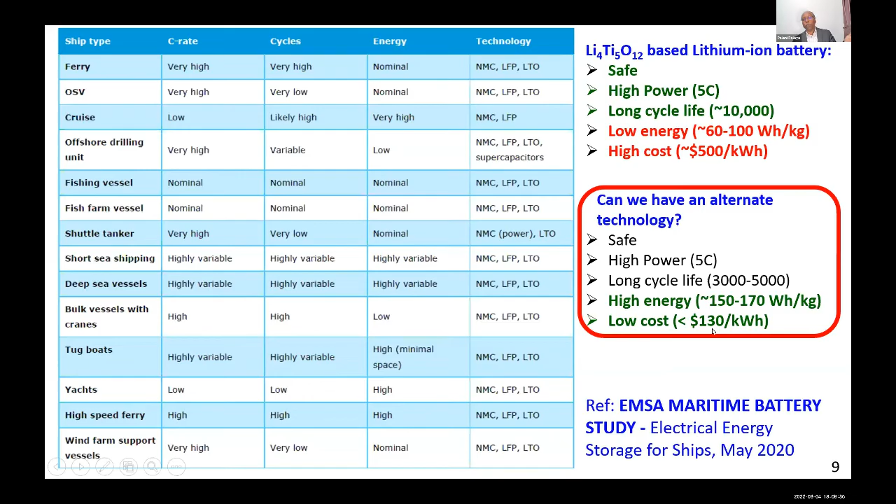So you need to bear in mind that anytime you have mechanical vibration, you have to use this type of lithium titanate. However, as I told you, lithium titanate technology has lower energy density and is very expensive. So the question is: is there an alternative that can give comparable performance to lithium titanate but is cheaper, somewhere about $100 to $120 or $130 per kilowatt-hour?

That is the open question, and that's where I'm going to talk about sodium-ion batteries. You know that lithium chemistry, although extensively accepted, always has a so-called supply chain issue, because lithium supply is typically in South America, or maybe China, or maybe Australia, which leads to geopolitical issues. I don't have to tell this particularly to the Indian community, they know that very well. The question is: is there a smart way of handling this supply chain issue? Of course, sodium compound is available in seawater.

So that is one way to go, where you don't have to depend on any country. This is something I should acknowledge: Faradion in UK has successfully demonstrated this at least at 1 kilowatt-hour pack level, and Reliance in India has bought it 100% for 100 million pounds. This is a good example I'm taking as a reference. But there are also technologies developed in France and China, etc.

CATL, for example, is a well-known lithium-ion battery manufacturer, and they are going to introduce a sodium-ion battery by 2023. So how does our sodium-ion battery technology developed in NUS differ from others?

We have three components: you can see the electrolyte, we use a non-flammable electrolyte; we use a robust cathode, which is a phosphate, PO4-based cathode; and we also use our own in-house carbon. I'm going to show a few examples that will convince you we are probably moving in the right direction.

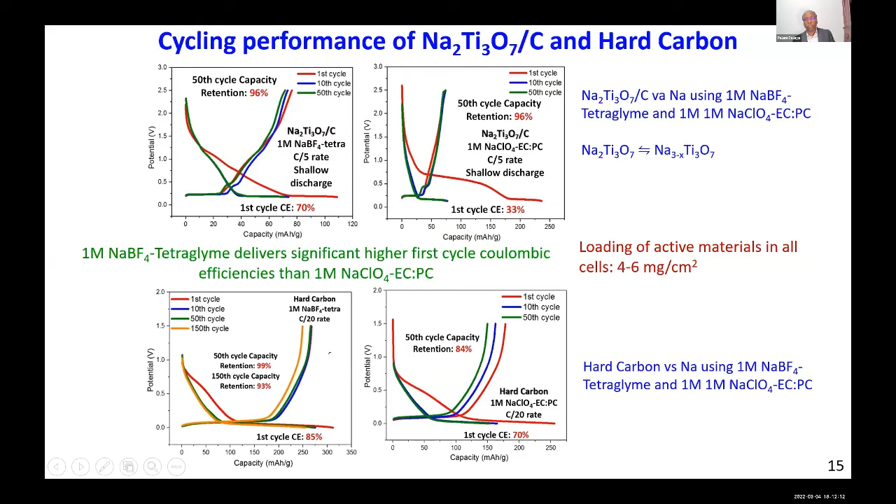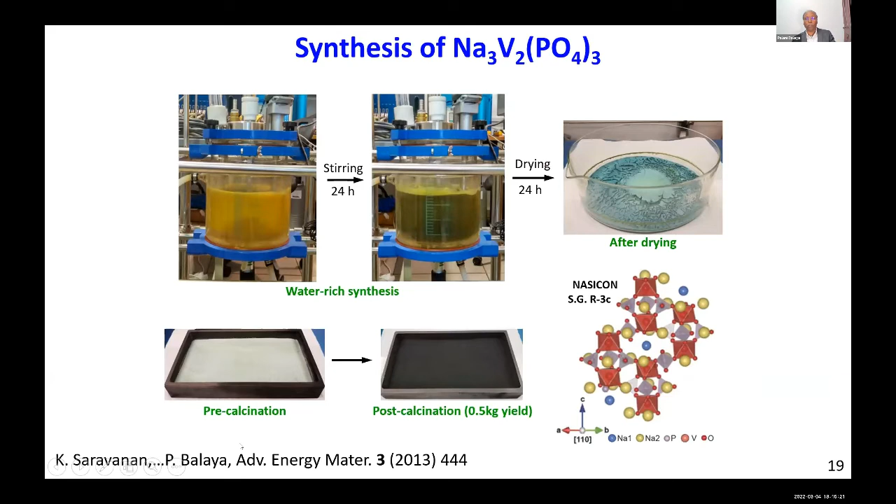We use, as I told you, polyanion, sodium vanadium phosphate. You can see here, this is a simple reaction using a 5-liter reactor, producing about 0.5 kg of sodium vanadium phosphate per reaction. Let's not go into detail now since this is already published, but we also have a patent on it. So that is the kilo scale lab we have: a 5-liter reactor, which I showed in the previous slide, a 20-liter reactor, and a 200-liter reactor.

Otherwise, there's a deep valley of risk if somebody is putting in $10 million or $20 million to scale it up. This is extremely important—we should shallow down the risk so that investors come forward and put in the funding. So we make use of this kilo scale lab to convince the investor.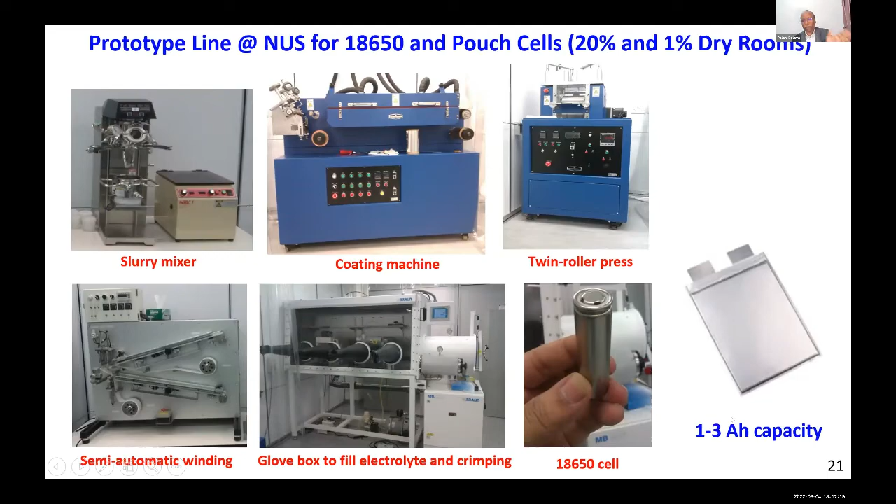So we are somewhere about 68 to 70 watt-hour per kg. If you go for soft packing, it's equivalent to about 90 watt-hour per kg.

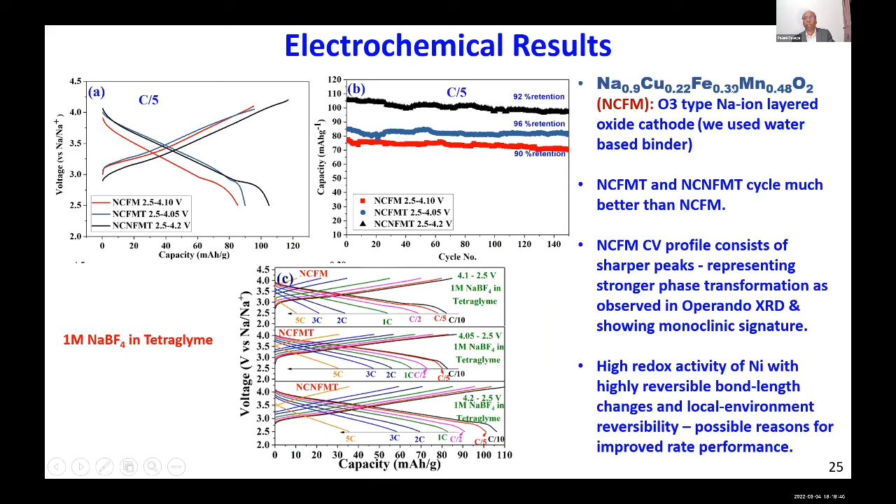The message here is our sodium ion cell uses non-flammable electrolyte, and it does not have dendrite growth. That's the most important thing, no dendrite growth. We are targeting about 150 to 170 watt-hour per kg in about 2 to 3 years, 3,000 cycles, and charging typically about 15 minutes or so. We have our own technology for that.

This is a summary of what I mentioned. I talked about non-flammable electrolyte, hard carbon, and sodium vanadium phosphate, but due to lack of time I could not go into detail, though a very detailed paper is already available. With that, I would like to thank all the group members, and Ministry of Education, NRF, as well as NUS for the funding. Thank you for your attention.

All right, so I'm based in Houston. It's early morning, I'm just waking up. My presentation is a little bit different from the other eminent speakers this evening because I have no chemical formula. I'm not going to talk about lithium or sodium and things like that. It's all about high pressure hydrogen in a very, very simple storage.

In the beginning, we had a very good introduction from Professor Basu. He talked about renewable energy and intermittency. Essentially, it's all about solving this particular formula: we have very, very clean renewable energy from wind and solar, but unfortunately it is intermittent. In order to solve for the intermittency, typically what people do is rely on the grid. Maybe you have a large solar farm, but when the sun stops producing, you have to rely on the grid to make up the power.

But what do the utilities do? They have to fire up these large peaker plants - a natural gas based system that is very polluting, in short bursts. So sometimes it's kind of ironic that in the presence of very, very clean renewable energy, we have to rely on these very polluting electric generation plants. It's very, very ironic. And the solution to that, of course, is energy storage.

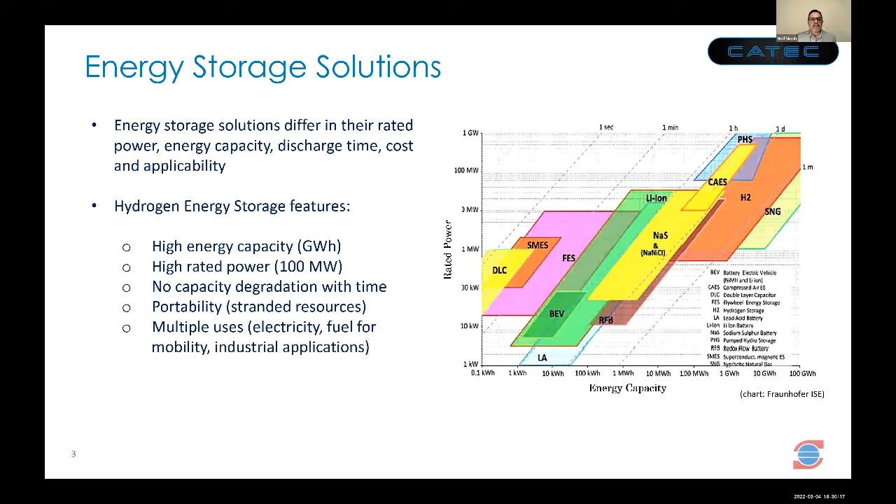That's where one of the advantages of hydrogen comes in. And also you need to have multiple uses - I think that becomes evident with hydrogen. It can be used for electricity: you convert electricity to hydrogen, you store the hydrogen, and convert it back to electricity using fuel cells. Or it can be used as fuel for mobility or industrial applications. There are many, many industrial applications that are coming up that use hydrogen.

Many speakers talked about energy density. Let me give you a practical example here. Let's say, for example, you want a 30 megawatt system and you want to store for 48 hours, which is equating to about 1.44 gigawatt hour energy storage.

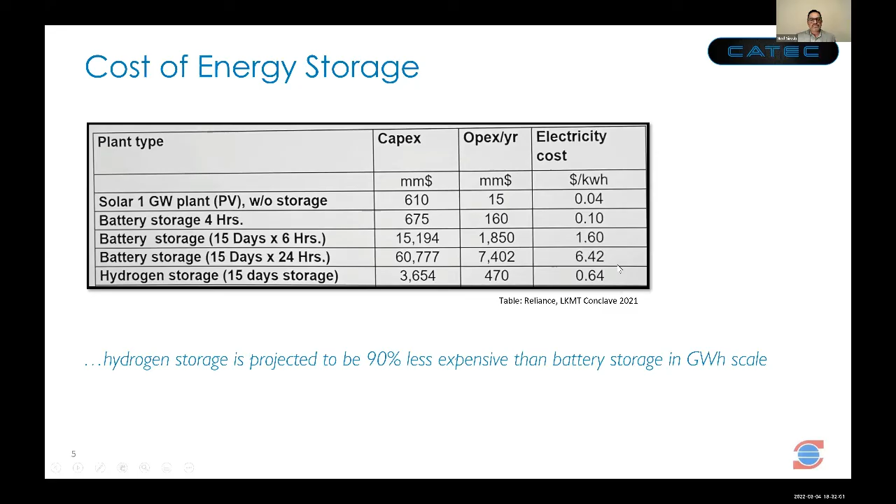So when we look at the entire hydrogen value chain, the focus of this conference is really the clean renewable energy, and storing that renewable energy in various technologies. When you have low cost and abundant renewable energy, that can convert to low cost green hydrogen. When we say green, I'm sure you're familiar with that term. If hydrogen is produced from renewable energy using electrolysis, that's called green hydrogen.

Just want to spend a few seconds on what's going on in the US in terms of the hydrogen economy. As I mentioned before, hydrogen production points will be in the hubs of green, low-cost electricity. But unfortunately, those areas may not be the population centers. So the demand locations may be different from the renewable energy. And this may be true in India as well, where the large solar farms may be away from the cities, and maybe they're not connected by grid. So there has to be some way to connect the two.

Similar to in the US, there are fragmented supply and demand locations, and the existing infrastructure is typically unable to move the large volumes of hydrogen between supply and demand points. And that is one of the keys for very effective energy storage. So behind electricity, transportation and storage is the single largest cost component. In other words, you produce hydrogen, let's say from very, very low cost electricity, but that's not good enough. You need to store and transport it, get it to where it is needed, and that needs to be done effectively.

It can be done by pipelines, by liquid transportation, or compressed transportation. I'll talk about those things. In Texas, there are some hydrogen pipelines already because there are many refineries on the Gulf Coast, and hydrogen is transported through pipelines to those very large consumption centers.

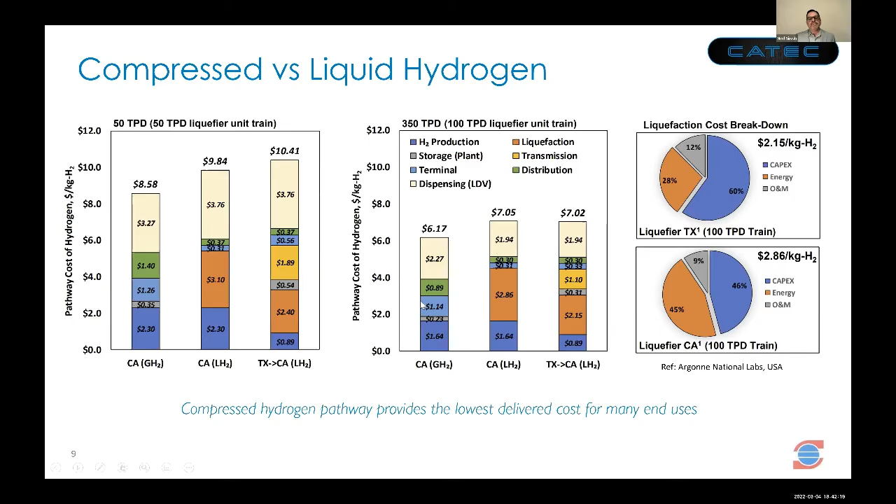Now, how do we store compressed gas? Maybe at very, very large scale with wind farms or solar and so on, we can store it underground. This is one of the concepts being developed now at some of the national labs in the US: pre-stressed concrete, steel chambers underground. Typically, if you want a megawatt hour of storage, you need a 10-foot diameter, 20-foot long tank. But this is still under development, and obviously this is not portable.

The other option is maybe long tubes buried in the ground, assuming you have the right geography and the nature of the soil and rocks and so on. That's one of the options being considered as well. And this kind of storage is being considered at the gigawatt hour scale.

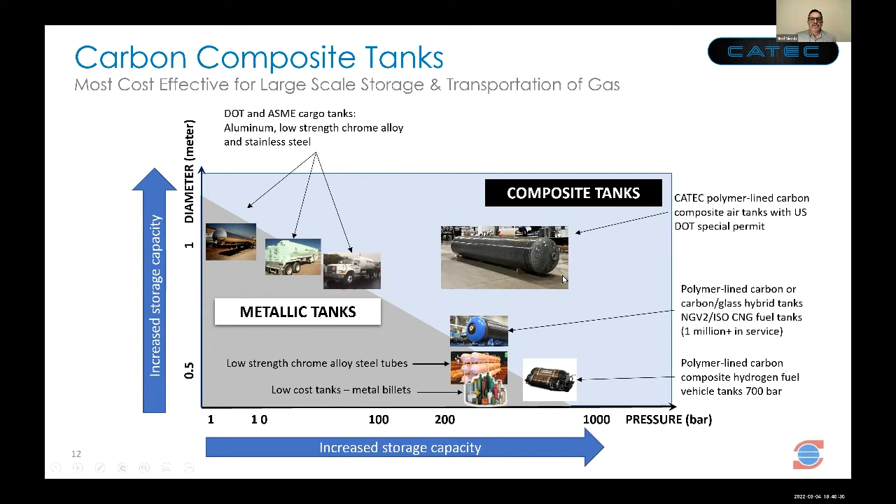Here you're seeing a composite tank, more than a meter in diameter and almost 8 meters long. It's commercially produced now by CATEC. It gives an advantage because you're able to increase both the capacity and the pressure. The reason is decoupling the corrosion of hydrogen from the strength requirements. In other words, you have carbon composite on the outside carrying the pressure, and a polymer lining that takes care of the corrosivity of hydrogen.

Safety is very important, and compressed cylinders are all around us. They have been around for a long time, beginning with steam boilers almost 100 years ago. In fact, probably the world's first pressure vessel code was from ASME, the American Society of Mechanical Engineers. At least that's what I heard. Maybe there's a standard in India before that. I'm not quite sure.

So the work of ASME has kept pressure vessels pretty safe over the years. But the point I want to make is the American Society of Mechanical Engineers actually published about 10 years ago the very first code related to composites. In other words, it took about 100 years to migrate from steel to composites, and I was one of the members in this drafting committee. So we've come a long way, but it's paving the way towards a new generation of pressure vessels that are much bigger, very cost effective, and really tailor-made for storing large amounts of hydrogen in this era of renewable energy.

When we talk about pressure vessels, if you dive deep into this, you'll keep hearing terms like type 1, type 2, type 3, and type 4. Type 1 is the traditional all-metal steel pressure vessel that is very common for industrial gases, oxygen, acetylene, natural gas, and carbon dioxide.

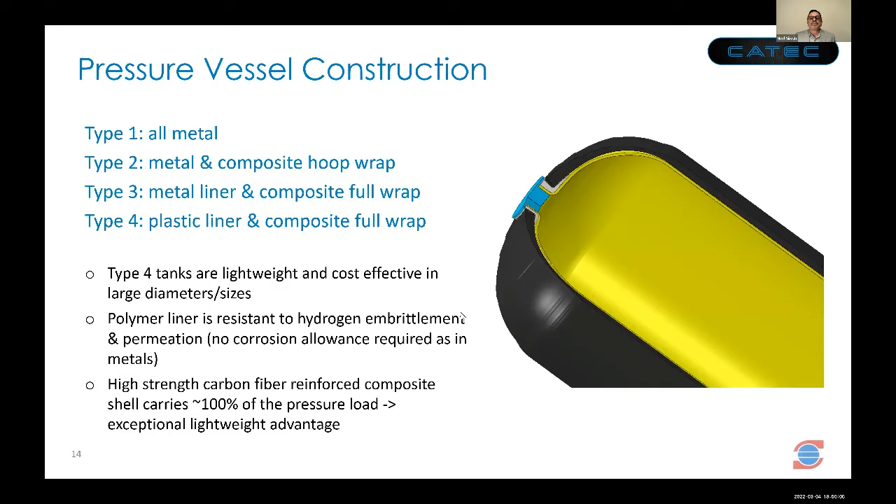Safety is number one, of course, and there are many regulations that we need to go through for ground storage as well as for transportation. For example, in the US, there are standards such as ASME Section 10 - if it is steel, the safety margin is 5, but if it is class 3, which is the composite pressure vessel, it's 2.25. So that gives a tremendous cost advantage.

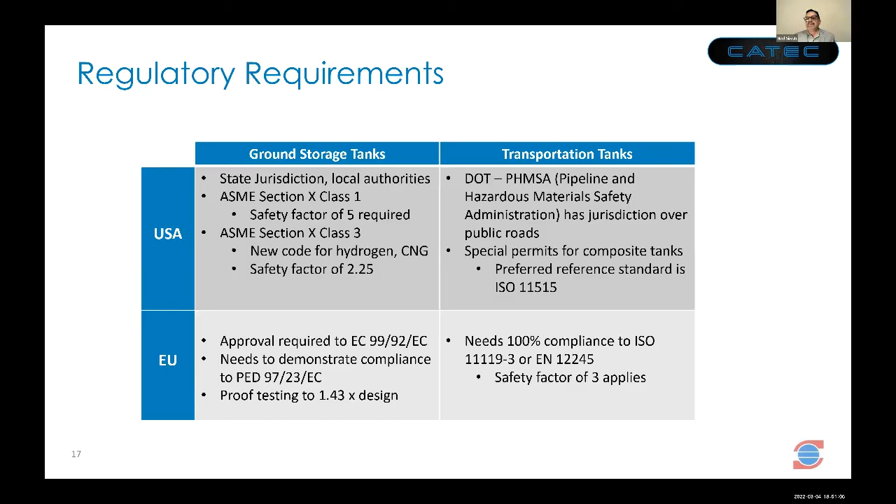The safety margin for composites is lower because carbon has a very unique fatigue characteristic - there is not too much drop in the fatigue strength. That means the safety margin can be lower.

We have to go through many tests in order to qualify these tanks, including burst tests and fatigue cycles, typically about 15,000 cycles. Creep testing means you keep it at a very high temperature for almost 3 months, and they still need to have good burst strength.

Flaw tests - you introduce several cuts on the tank and it still needs to go through the fatigue cycles, permeation, penetration. Essentially, you actually have to shoot it with a bullet. Typical bullets will not penetrate these composites, so we have to use an armor-piercing bullet, and it still cannot burst.

That's a requirement, and there are similar requirements from ISO standards. In India, the PESO is responsible for regulating these, and there are ISO standards being used in India as well, with a very, very long list of tests that really make sure these tanks are as safe as they can be.

Validation tests - this is another summary of these tests, and this kind of test, they have all been passed. So it's a mature technology, it's a safe technology.

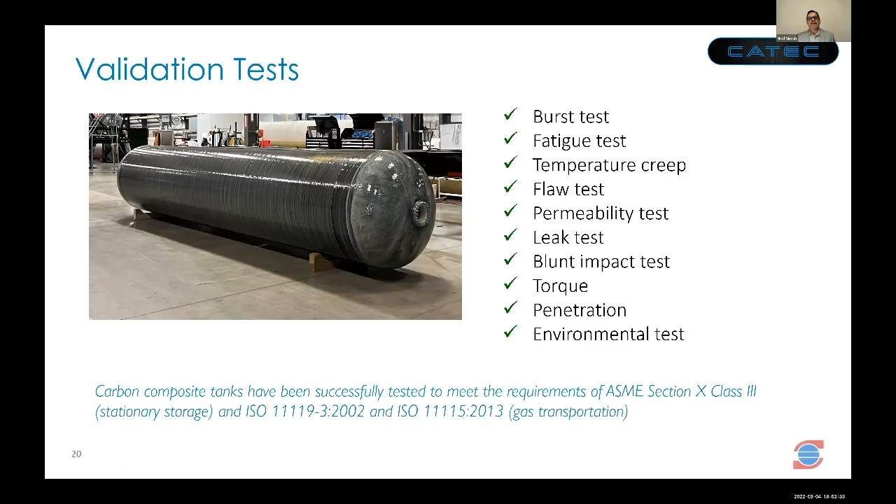When you look at natural gas and hydrogen, there are probably about 3 million tanks from various manufacturers in service all over the world in vehicular applications. So similar technologies are now migrating into large scale hydrogen storage, natural gas storage, and so on.

So let me just - this is one of my last slides. I just want to talk about the cost.

Talking about the cost of generation of hydrogen, the cost of hydrogen production is about $2.30. The cost of compression, storage, and dispensing is about $2.25 if you use steel tanks. This is for an example of a 2,000 kilogram per day project, using a 5 megawatt electrolyzer, and the storage capacity is 70 megawatt hour. So the net effect is that the delivered cost of hydrogen, the levelized cost, is around $4.55 if you use steel tanks.

But if you use composite tanks, the cost of storage, dispensing, and transportation goes down significantly. The primary difference is with steel tanks, the capacity of a trailer is only around 200 kilograms, whereas in composite it's about 1,200 kilograms. That means you need far fewer trailers. So when you consider the transportation cost, the overall operation and maintenance cost, and the capex, it's a lot cheaper to use these large composite tanks.